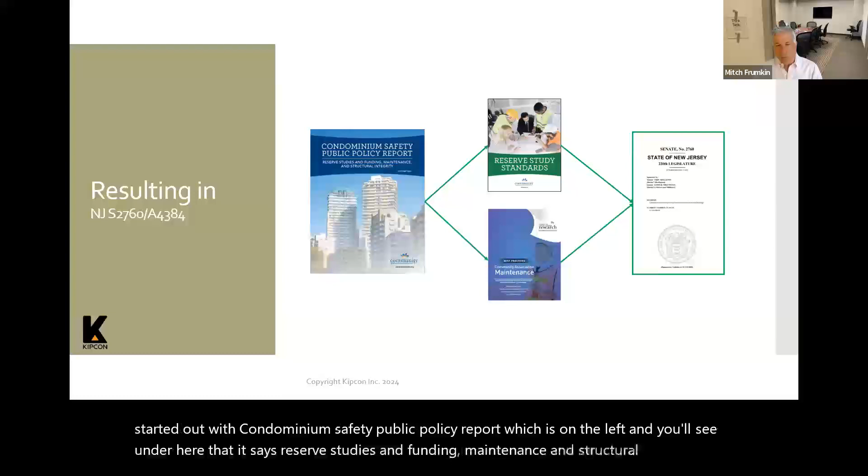And why that's there is because we quickly realized as part of this task force that building safety is not just based on reserves. There's three things that need to be taken into account, and that is reserves and funding, maintenance, and structural integrity inspections. Now, the reason why it says reserve studies and funding is because there are many states out there that have requirements that communities do reserve studies.

There are some states that have requirements that community associations do funding. And believe it or not, they don't line up, so they're not exactly the same. In some cases, you need to fund, but you don't need to do a study. In other states, you need to do a study, but you don't need to fund. So the public policy and the legislation in New Jersey is very specific in terms of both doing reserve studies and funding them.

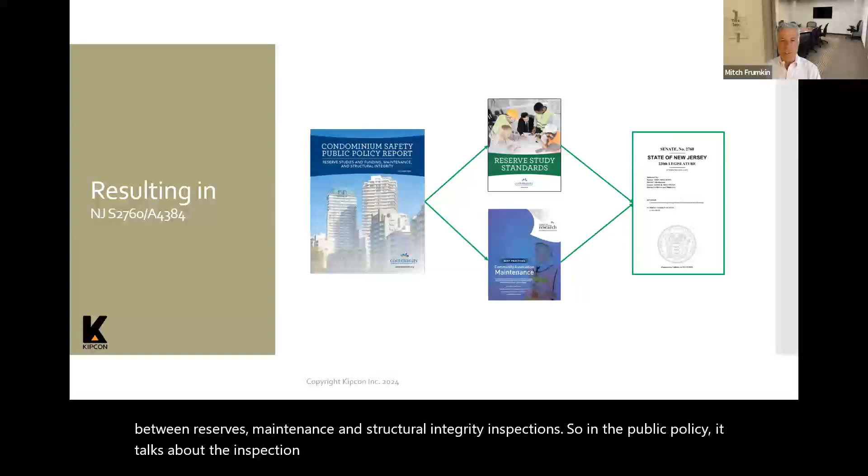The thing that came out of this task force, as I said, was that we immediately recognized the connection between reserves, maintenance, and structural integrity inspections. So in the public policy, it talks about the inspection portion of it, the structural integrity, but we also realized that the National Reserve Study standards needed to be updated.

So what they did is they put together a task force, which I was on with three other people from around the country, and the National Reserve Study standards were updated to reflect maintenance and structural integrity. And you'll see that the legislation in New Jersey refers directly to this standard as the standard to be used, and actually goes over and above what the Reserve Study standards require, and I can touch on that.

The other thing CAI realized is that there's really no publication out there from CAI regarding maintenance of buildings. So again, they put together a little task force, which I was on with 3 other people from around the country, and developed a best practices report on maintenance. You're more than welcome. These documents I'm mentioning are free, and we'd be happy to share with you copies of them.

But then as you see on the right, that's what the front page of the legislation in New Jersey looks like, which is directly tied into the public policy paper, the standards, and the maintenance best practices report. But keep in mind, what I'm talking about is happening even without legislation. What I'm talking about is something that communities should be doing and not be required to do by legislation, because what this legislation does is it really solves a problem, which I could talk about.

And I'll talk about also in the presentation that people are concerned with the cost of this. What is it going to cost to do? And from a life cycle cost basis, which I'm going to talk about, if we do what it says, it's going to cost your communities actually less. But there's also other things out there that are making this happen.

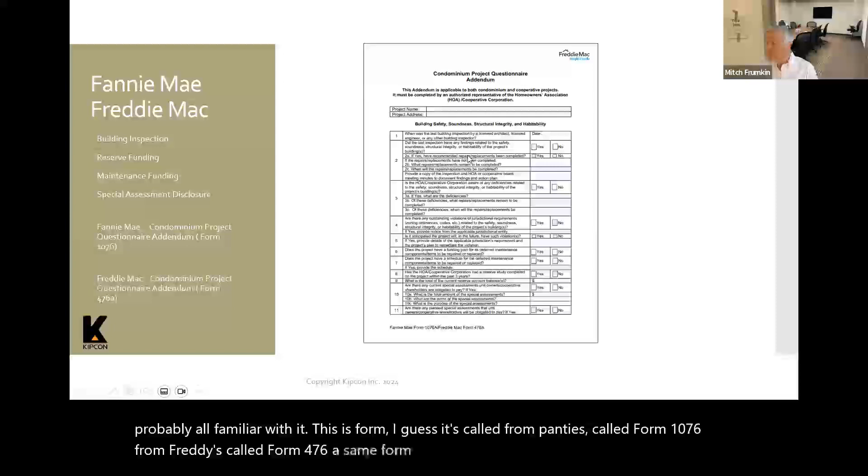As far as Fannie and Freddie, you're probably all familiar with it. From Fannie, it's called form 1076. From Freddie, it's called form 476A, same form essentially. And this is a form, an addendum to what you need to fill out for Fannie and Freddie these days in order to get approval for lending in your community for refinances and new purchases. It includes questions about building inspections, reserve funding, maintenance planning, special assessment disclosures. They want to know if there's special assessments and what they're for. And these are the forms that are put out by Fannie and Freddie.

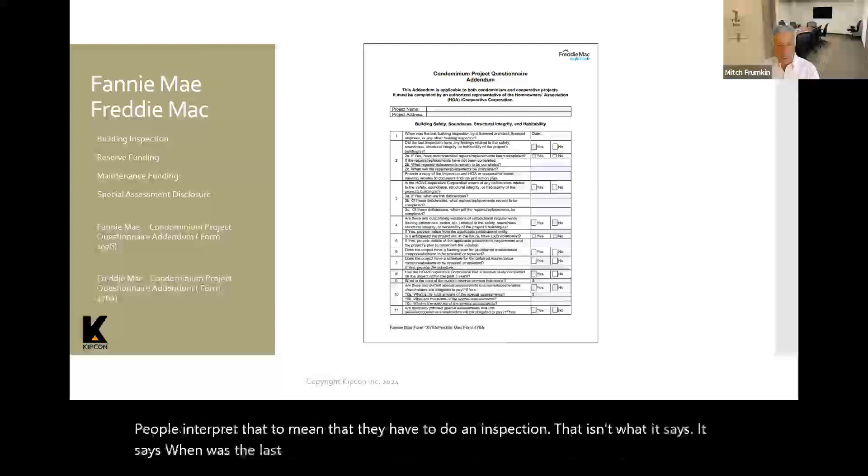One thing I always mention is that if you look at the form, question number 1 says, when was the last building inspection by a licensed architect, licensed engineer, or another building inspector? People interpret that to mean that they have to do an inspection. That isn't what it says. It says, when was the last time you had one done? And you could always answer that question to say, we haven't had one done. It doesn't say you have to do it. So be very careful about how you interpret these questions. But these are also other requirements that are going to make you do it.

So what are the solutions to the things we're talking about? As I mentioned, it's reserves and funding, maintenance, and structural integrity. And if you integrate all of these together, which is what I'm talking about, it will result in structurally safe communities, minimized life cycle costs, and maximized property values. So all of these things are connected. And if you think about all 3 of these together, everybody should want this for their communities, because it's going to cost them less and it's going to increase the value of their properties.

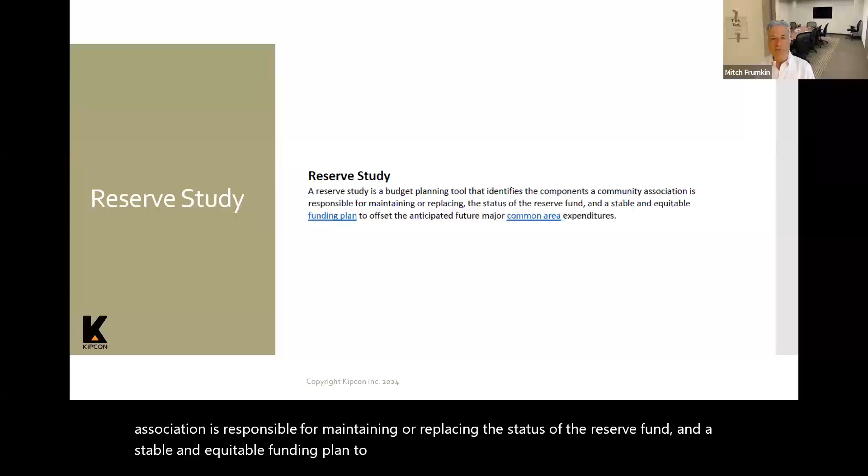So let's first talk about a reserve study. This, by the way, is taken directly out of the National Reserve Study Standards, the definition of a reserve study. A reserve study is a budget planning tool that identifies the components that a community association is responsible for maintaining or replacing, the status of the reserve fund, and a stable and equitable funding plan to offset the anticipated future major common area expenditures. That's the definition. Now, the legislation in New Jersey refers directly to the standards and this definition.

So the question always comes up, which I'll touch on, when you're doing a reserve study, how do you make sure it's adequate? What does that mean? Because the New Jersey legislation and the public policy refer to reserve studies being adequately funded. And I'm going to talk in a little while about what that means to be adequate.

So there are a few different types of studies that are out there. There's a full study. It's called a level 1. There's an update with a site visit, and there's an update with no site visit. That's called a level 3. So what do these include and what do you need?

For a full level 1 study, it includes figuring out what the components are that make up your community, the common elements that will have to be replaced. It includes a condition assessment to look at them to see what condition they're in, so you can establish their estimated remaining life based on the condition.

It includes the life evaluation. How long will they last? And how much will it cost to replace them? These are the estimates, which are based on the site visit to look at the condition. It includes a fund status and a funding plan. The funding plan I'll touch on because it specifically relates to what adequacy means.

But the fund status means how strong is your reserve fund? And this is a very misleading term, and I'll tell you why. Because if you take a component with a $100,000 replacement cost and a 10-year life, that means that you should be setting aside $10,000 a year. So after 3 years, you should have set aside 3 times $10,000 or $30,000. The fund status means how much of that did you actually set aside?

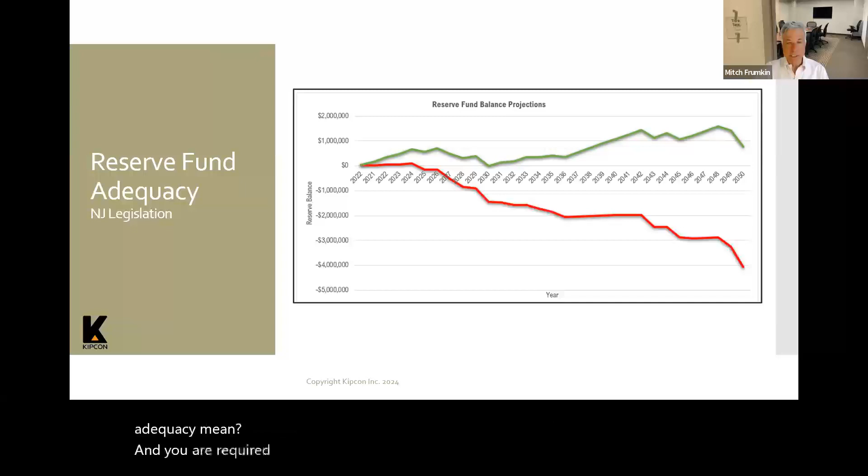And then the other thing that's a big question in terms of legislation is adequacy. What does adequacy mean? You are required in this new legislation, and it's also in the public policy and in the reserve study standards, to have adequate funding. The definition of adequate funding is that within 30 years from the date that you do your study, it should not drop below zero, where you need a special assessment or you need to borrow.

Now, if you look at the graph I'm showing you, the red line shows what's going to happen if this association continues to fund the way they're funding. They're going to run into a deficit. The red line means it's below zero, so they have a deficit. And when it comes time to replace something, they're going to need to borrow money or special assess. But keep in mind, if you have a leaky roof, the roof isn't waiting for you to get the money. You're going to need to replace it. So if you're in a deficit, it's not adequately funded. The definition of adequate, which is in the legislation, is that it cannot fall below zero.

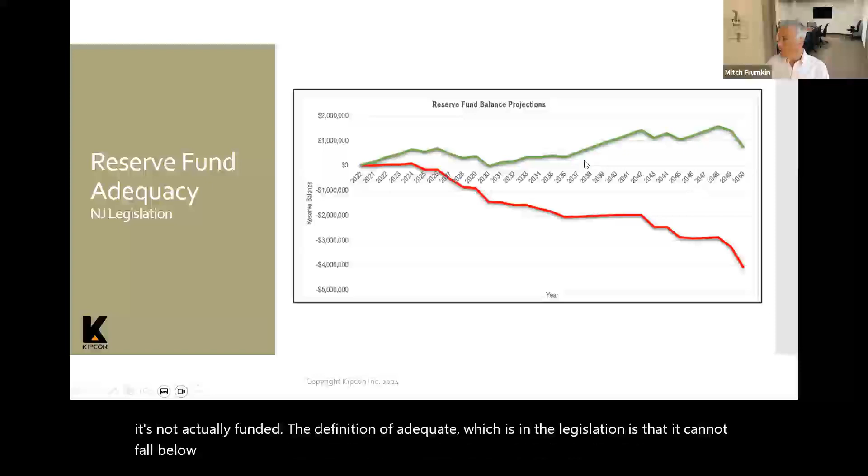Now, if you look at this green line, you'll see at the lowest point in year 2030, it drops down to zero, but it doesn't go below zero. Based on the legislation, that is adequate. But our recommendation, and all people that do reserve studies, do not recommend going to zero, because it may be adequate theoretically, but the reality is that if something needs to be replaced a year early, or it costs $10 more to replace it, you're going to run into a deficit.

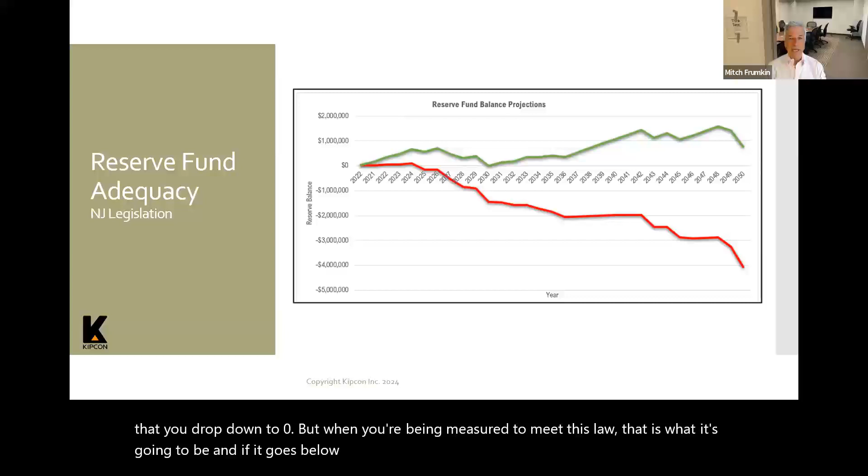That's what's known as threshold funding, where you're above zero and you establish a threshold. I'm not going to go into how to come up with the threshold for your community. That's a completely other webinar, but this is what the legislation says, and I do not recommend that you drop down to zero. But when you're being measured to meet this law, that is what it's going to be. And if it goes below zero, you're going to have to get back to adequacy. You have a number of years, which I can touch on if anybody would like me to, to get back to adequate funding by increasing your funding. So I'm going to leave that to see, Mitch, if anybody has any questions about that, but it does require you to catch up and get back to adequacy.

The public policy does not match exactly. For example, the legislation says that the person who prepares your reserve study needs to have their RS designation, the Reserve Specialist designation given out by CAI, or they need to be a licensed engineer or a licensed architect. The standard that needs to be used, irrespective of who does it, is the National Reserve Study Standards of CAI or similar standards of another recognized national organization. There really isn't another similar standard. These are pretty much the specific words that come out of legislation in New Jersey.

And keep in mind, it doesn't have to be done by a reserve specialist. It can be done by a licensed engineer or an architect. But just because you're a licensed engineer or an architect does not mean you know how to do a reserve study. It's kind of a special art, as I'm sure you all know. So I would be very careful, and my suggestion is that you stick with a reserve specialist. And many reserve specialists like myself are also licensed engineers.

For example, I have my RS and I'm a licensed engineer. But this is the requirement. To put it in context on a national level, I think there's about 365,000 community associations across the country, if I remember the latest number. And all of them, or the majority of them, are going to need to do reserve studies based on legislation and based on the banking requirements.

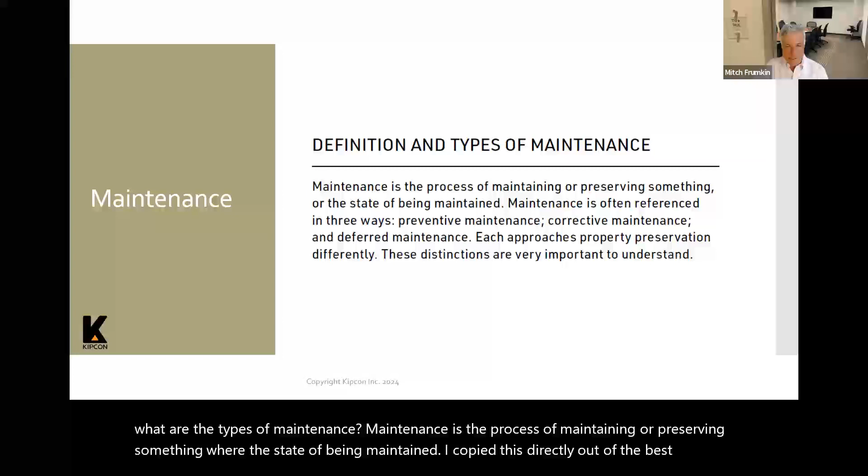Maintenance, what's the definition and what are the types of maintenance? Maintenance is the process of maintaining or preserving something or the state of being maintained. I copied this directly out of the best practices report on maintenance. Maintenance is often referenced in 3 ways, and I'll touch on them: preventive maintenance, corrective maintenance, and deferred maintenance.

Now, when you go into legislation in New Jersey, as well as the public policy paper it's based on, it specifically refers to preventive maintenance and corrective maintenance. It does not use the term deferred maintenance. The reason for that is that deferred maintenance means you do nothing.

Preventive maintenance is a proactive plan aimed at reducing the deterioration of the component so it can achieve its useful life. So if you have something with a 20-year life on your reserve study, you want to make sure it attains 20 years. So you proactively do something so that it attains that full useful life.

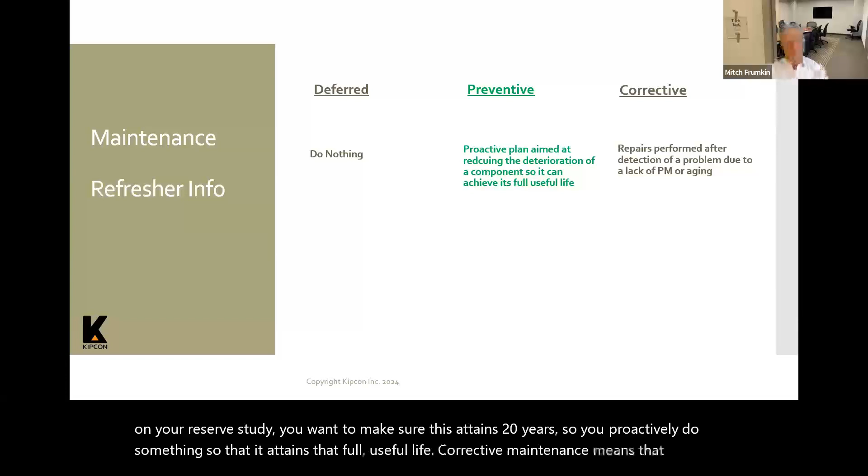Corrective maintenance means that if you don't do preventive maintenance and something starts falling apart, you have to fix it. It's repairs performed after detection of a problem due to a lack of preventive maintenance or aging. The other thing to keep in mind is corrective maintenance happens even if you do preventive maintenance, because as things age, you can't predict how they're going to age and what needs to be fixed. If you fix it sooner rather than later by doing corrective maintenance, it's going to cost you a lot less money.

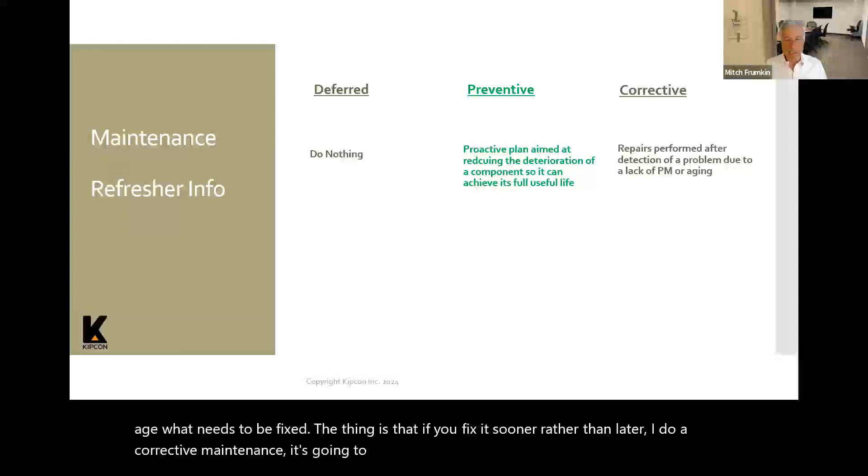The other thing is, from the legislative perspective in New Jersey, when you do a structural integrity inspection of your building, if you need to, which I'll get to, the report needs to include any necessary corrective maintenance that needs to be done to the structure. The legislative requirements in New Jersey say that if that structural engineering report says you need to do corrective maintenance, that corrective maintenance should be included in the reserve study. The national standards also say that corrective maintenance should be included.

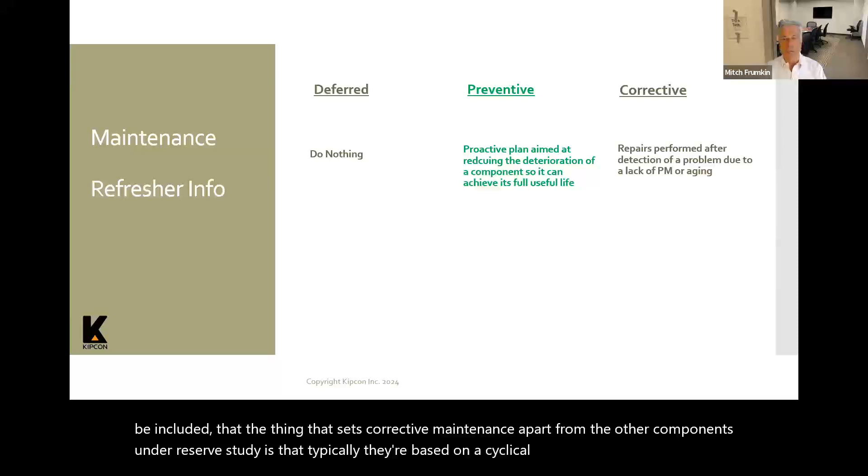Now, the thing that sets corrective maintenance apart from the other components on a reserve study is that typically they're based on a cyclical replacement. You replace a roof every 20 years or 25 years. Corrective maintenance is a one-time thing. You shouldn't have to correct things over and over on a time frame. So corrective maintenance is added to your reserve study as happening one time. So you have to be very careful when that's added. You have to make sure that the reserve provider is only including it as happening once, not over and over again, but it should be included in your reserve study based on the legislative requirements.

So what do you do? Deferred maintenance, you should never do it. Deferred maintenance means you're not doing it, and that's not the approach you should take. Preventive maintenance, you should all be putting together a preventive maintenance program for your community. When you do your reserve studies based on the New Jersey legislative requirements, you're going to have to do it. It has to be part of the reserve study. And then you should do corrective maintenance as needed, because if you don't, you're ultimately going to have to do it, but the sooner you do it, the less it's going to cost.

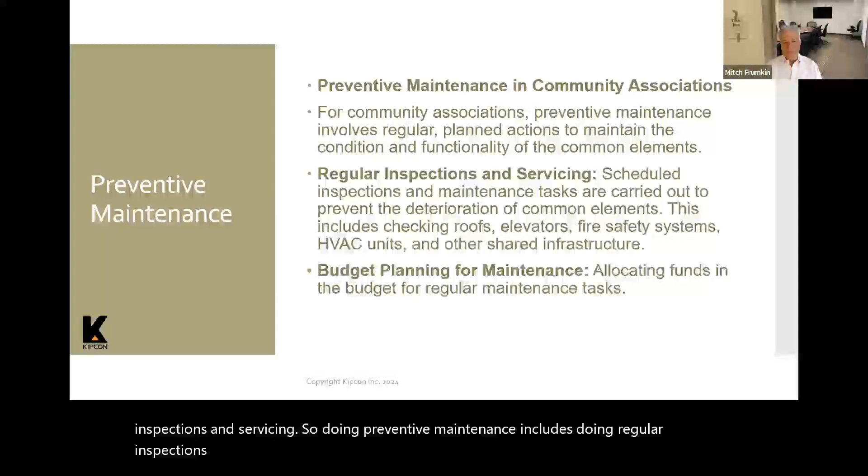So what does preventive maintenance include for community associations? Keep in mind, it's not just doing something to a component, but it includes regular inspections and servicing. If you're in the state of New Jersey, that regular inspection is being done as part of the reserve study, because you're not only updating the components in the reserve study, but you're updating the preventive maintenance plan. So that regular inspection takes place when you do the reserve study update.

If you do the reserve study update from 3 years to 5 years, I think it's too far apart. And regular inspections can be done by management. It can be done by many different people. But in some cases, communities ask us to do a yearly inspection just to see if anything's deteriorating too quickly so that they can fix it or maintain it and not wait 3 years. But it includes regular inspections. It includes checking roofs, elevators, fire safety systems, and other shared infrastructure.

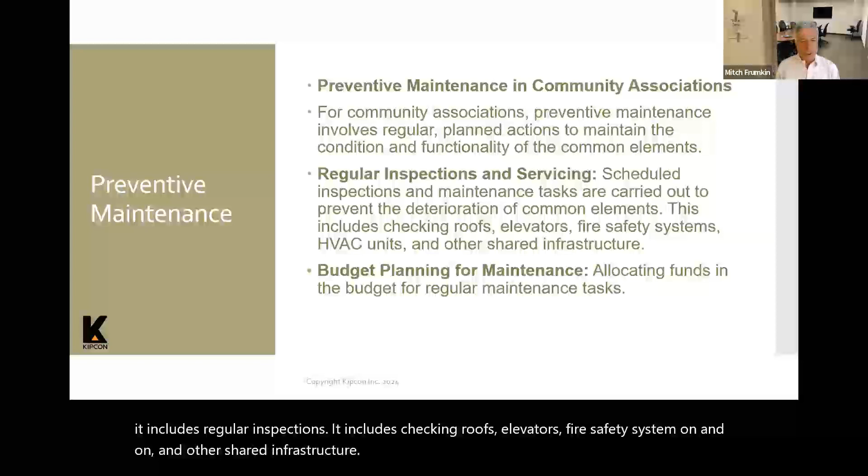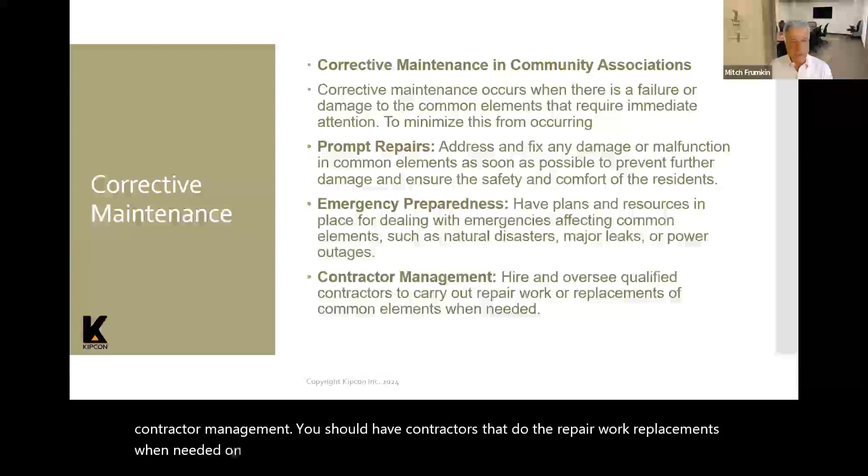The other thing that you should be doing is budget planning for maintenance. You should be allocating the funds, but in New Jersey, like I mentioned, from a legislative perspective, you are, because you have to, it's the law. What's corrective maintenance? Corrective maintenance is you should do prompt repairs if something breaks, as I mentioned, because it'll cost less. Emergency, you should have plans in place for dealing with emergencies affecting common elements. And you should have contractor management. You should have contractors that do the repair work or replacements when needed on an ongoing basis. So that's corrective maintenance.

Now let's talk about structural assessments. A lot of questions have come up about the legislation in New Jersey in regards to what does this really mean and what needs to be done. So that's what I'm going to be touching on now. But before I go on to structural, Jody, is there anything in the chat box about reserves that I should respond to now? Yeah, so there's a couple of questions. So one is, assuming the association has 10 years to catch up to fully funded.

Jody, I can't hear you. Oh, you can't? You know what I did? I didn't have my microphone on. I'm glad you could hear me because I couldn't hear you. Okay, sorry. Okay, that's why you weren't letting me interrupt you before. I'm sorry, I didn't hear you. I wish I could turn off everybody that way.

All right, so assuming the association has 10 years to catch up to fully funded, how do they deal with a large reserve project that occurs in the middle of the period, like new asphalt for a parking lot in year 6? In year 10, they would no longer need to show fully funded for the asphalt because it was recently completed. Yes? Yeah, I kind of assumed I'd get this question, because I know in the law in New Jersey, if in order to get to adequate funding, which I described, you need to set aside more than 10% of your last year's common area assessments.

So let's say your last year's common assessments were $100,000. If in order to get adequate funding you have to set aside more than 10% of that, or $10,000, the legislation says you have 10 years to catch up. So if you're $10,000 short, it's $1,000 a year over 10 years. But if something needs to be replaced sooner than that 10-year period and will force you into a deficit, you have to catch up to adequate funding before that component has to be replaced, which is logical because it's going to need to be replaced. If you don't have the money, you're going to have a special assessment or you're going to need to borrow.

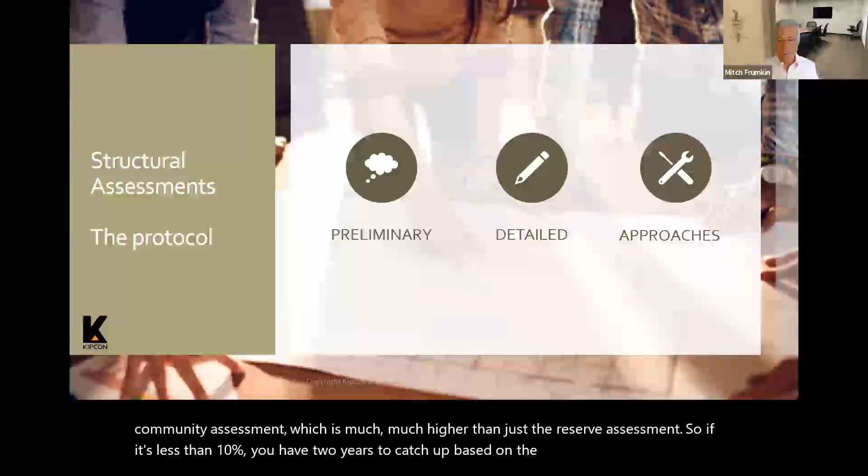The thing that's interesting is that there's a little conflict in the legislation. It says that if it's more than 10%, you have 10 years to catch up. But at the same time, it says you have to update your reserve study a maximum of every 5 years. So what happens if you have to catch up? You have 10 years, but then after year 5, you're updating your reserve study. The thing that's interesting, if you follow what I'm saying, though it's not a reserve presentation, is that as soon as you get to that update period at 5 years, when you're updating it, you're preparing a 30-year funding plan.

To show adequacy, you no longer are locked in to that 5-year additional period to catch up, because it goes out 30 years. I've really gotten into the weeds a little on that one, but there's a little conflict in the legislation that we all missed in terms of update period versus catch-up period. But the legislation is pretty clear that you do have to get to adequate funding by a period of time. And I hope I answered that question and more.

Jody, are there any other ones about reserves? Somebody wanted to know: on their audited condo docs, they have a deferred maintenance fund. Should they change that? Another great question. In our industry for many, many years, including us, we're not exempt from this, people have been using the term deferred maintenance improperly. They've been using the term deferred maintenance when they really meant preventive maintenance.

Everybody I've spoken to, now that the legislation is in place, which matches the best practices report on maintenance, is changing the terminology they use from deferred maintenance to preventive maintenance. So it's a great question. We've been using the wrong term forever because we just have. So change it wherever you have it to preventive maintenance.

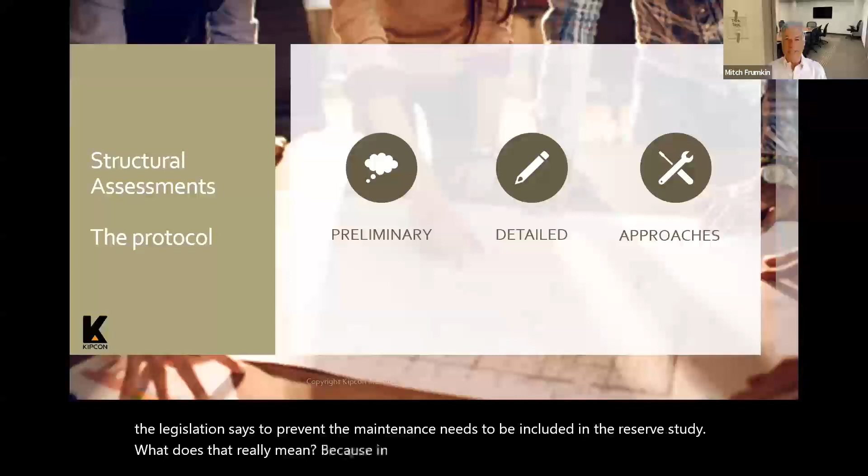The other thing that comes up with that question is that the legislation says preventive maintenance needs to be included in the reserve study. What does that really mean? Because in some communities, they have a line item or multiple line items for preventive maintenance within their operating budget. So the question comes up, do we need to move all of those into our reserve study rather than in the operating budget?

That dust has yet to settle, but where it says included in your reserve study, I don't really see a reason why in the reserve study you can't refer to another part of your budget where that preventive maintenance is. And that in essence will be including it in the reserve study. So that's another question that's been coming up.

Jody, any other ones? Yeah, somebody would also like you to repeat the definition of adequate funding. Adequate funding essentially means that if you do a reserve study, within 30 years of doing that reserve study, if your fund account goes below 0, you're not adequate. So essentially, if you're going to need a special assessment or to borrow, same thing. The concept is go out 30 years with a cash flow projection, and if it goes below 0, you are not adequately funded.

Anything else? I think we're good. Okay, because I see there's 42 comments in there.

All right, now I'm going to move on to the structural assessments. There's a few different types of structural assessments, known as preliminary and detailed. I'm going to touch on what they mean, and there's a number of different approaches to do them. There's been a lot of questions about how do you do this, so I'll touch on that. I'm not going to go into detail. This is really not meant to be an engineer's training program, but to give you the concept of what it means.

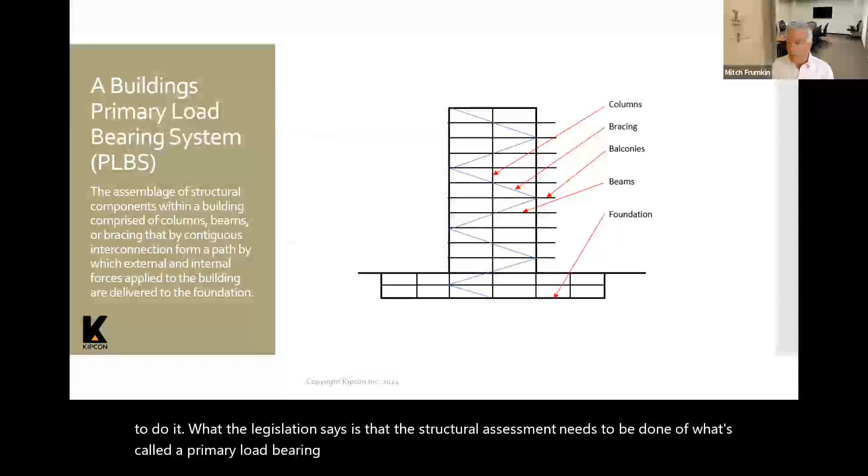But first, let's talk about when you do a structural assessment, what does it mean and who needs to do it? The legislation says the structural assessment needs to be done of what's called a primary load-bearing system of a building. Now, the primary load-bearing system, and that wording comes out of legislation and is a little technical in nature, means that if any one of these things of the structure disappears or rots away over years, a portion of the building or the entire building can collapse.

So the primary load-bearing system is made up of columns, which are these vertical guys that hold up the building, these braces, which are diagonal, which keep the building from falling over if the wind blows. The balconies, as I mentioned, were added. The beams, which are the horizontal. So if any one of these rot away, then the building can collapse. That's the primary load-bearing system.

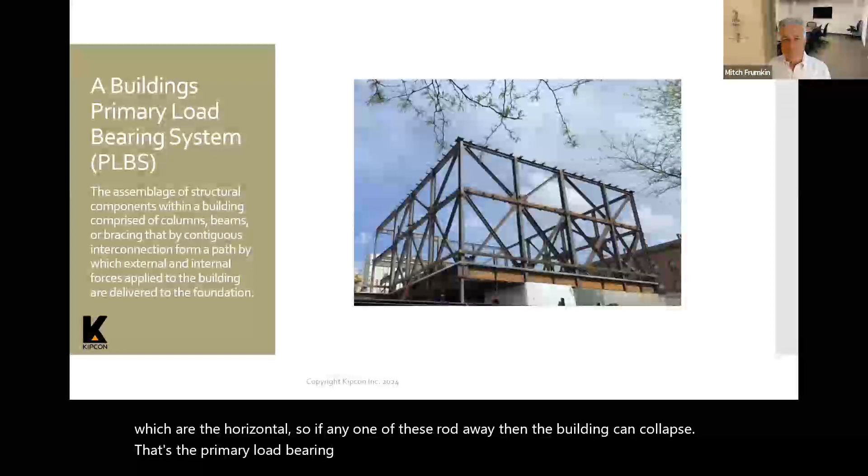This is an example of what it actually looks like on a building. This is a steel building. So picture this. You can see my pointer if I'm not mistaken. If this column right here rusts away, this entire corner of the building will collapse. It's the primary load-bearing system.

If this brace here rusts away and the wind blows, this upper part of the building will blow over. If this horizontal beam rusts away, then the building will collapse in this area. So keep in mind that the primary load-bearing system means something that is not repetitive, which means if something happens to one of them, it can affect a portion of the entire building.

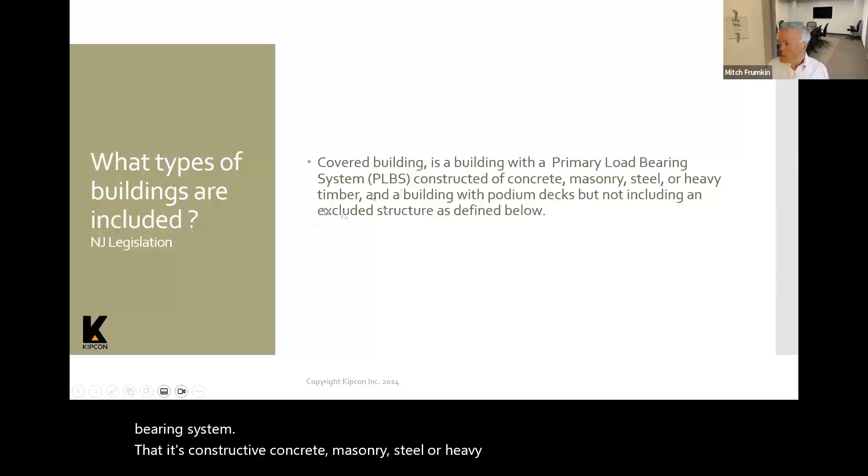And I'll show you an example of that, what that means also. But that's the primary load-bearing system. So buildings that have a primary load-bearing system that is constructed of concrete, masonry, steel, or heavy timber are buildings that are required to have a structural integrity inspection done.

We get a lot of calls from people who say, this is what my building looks like, do we need to have this inspection done? And a lot of times we can tell just by looking at the picture, but sometimes we can't. So we ask them if they have the architecture or the engineering drawings because we can look at them.

The other thing we do now is that when we do a reserve study, we'll evaluate your building as part of the reserve study to tell you whether or not we feel you need, based on the legislation, to have these structural integrity inspections done. So this is where it's needed.

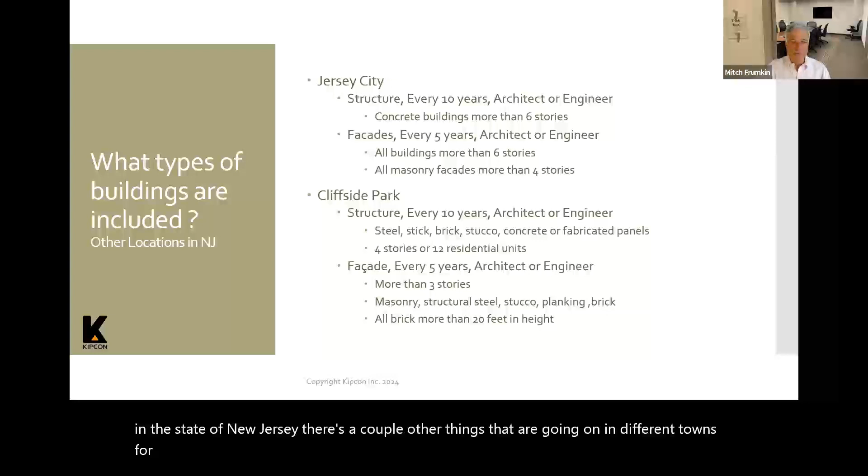Now, in the state of New Jersey, there's a couple other things that are going on in different towns. As I mentioned before, the legislation does not include looking at the facades. I will tell you that in Newcastle, Delaware, the legislation there does include the facades, but that was done later than New Jersey. And one of the things I've learned is once you get legislation in the works in a state, not just New Jersey, even if things change, it's tough to change the legislation.

But in Jersey City, it requires that you do a structural inspection every 10 years, done by an architect or engineer, and it says for concrete buildings more than 6 stories. Now, as soon as I saw this, I said, well, what if it's a concrete building that's less than 6 stories that's falling apart? Because the primary load-bearing system is not based on the height of the building, it's based on the materials that it's made out of.

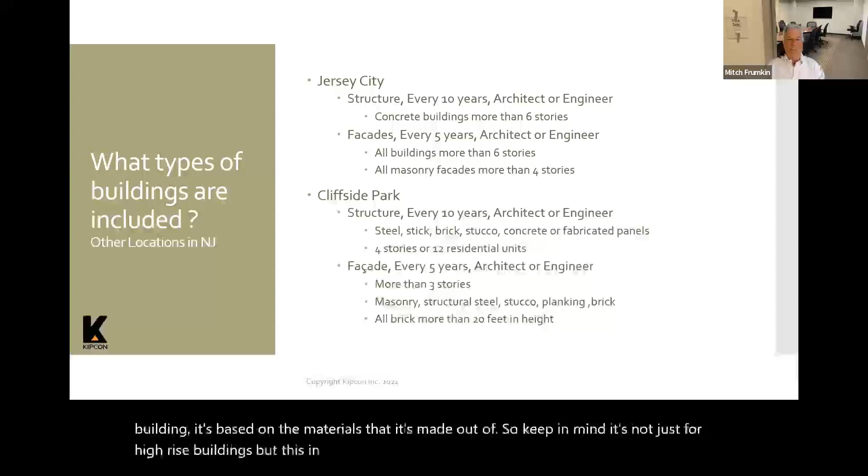So keep in mind, it's not just for high-rise buildings, but Jersey City says for concrete buildings more than 6 stories. What if you have a steel building that's more than 6 stories? On and on. Also in Jersey City, it says you have to inspect the facades every 5 years by an architect or an engineer, and the structure every 10 years by an architect or an engineer.

The legislation in New Jersey says that the structural inspection needs to be done by an engineer. It does not give the option of it being done by an architect. Architects are not trained in engineering, and engineers are not trained in architecture. So in this case, it says architect or engineer, but keep in mind, when you're soliciting a proposal from somebody to do these inspections, make sure they have the qualifications.

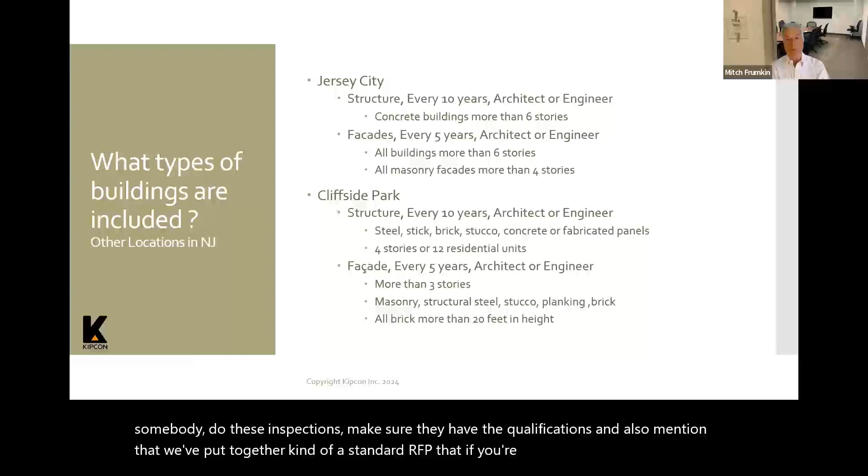And I'll also mention that we've put together a standard RFP so that if you're selecting an engineer to do either a reserve study based on the new legislation or a structural integrity inspection, we can provide you with a standard RFP to select a bid. It doesn't have Kipcon's name on it, but it is in conformance with this legislation if you'd like a copy.

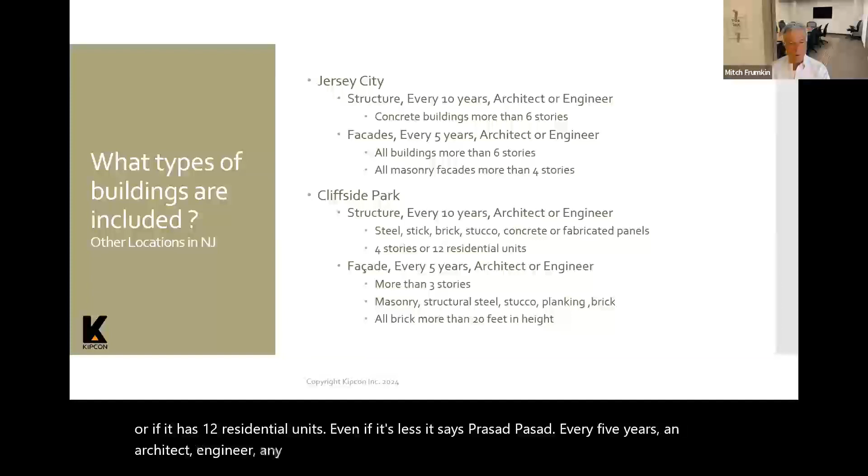Jersey City says facades every 5 years for all buildings more than 6 stories, or all masonry facades more than 4 stories. For Cliffside Park, it says structure every 10 years, architect or engineer, steel, stick, brick, stucco, concrete, or fabricated panel structure, 4 stories or more in height, or if it has 12 residential units, even if it's less. It says facade every 5 years, architect or engineer, any building more than 3 stories, or if it's a brick building that's more than 20 feet, even if it's less than 3 stories, it would need to have the facade inspected. So I don't really know where all these things came from, but that's what they say.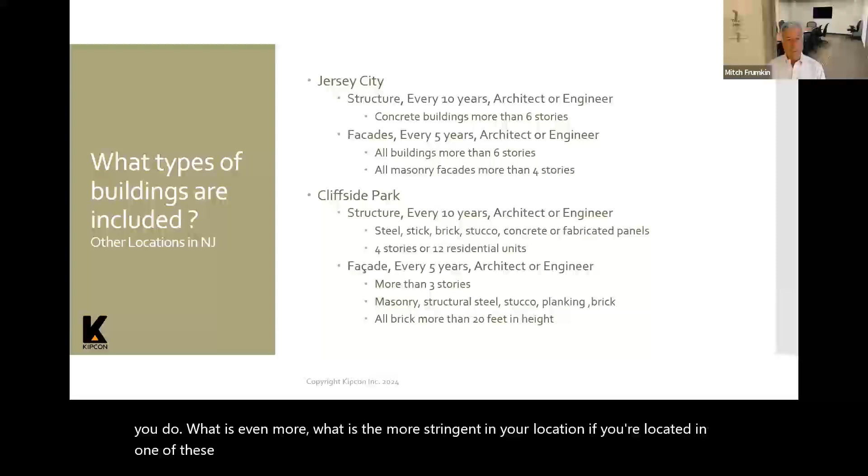From listening to all the legal scholars and the politicians I've spoken to, if this is more stringent than what the state legislation requires, you do what is more stringent in your location if you're located in one of these places. So for example, in Jersey City, the structural criteria in the legislation is more detailed and has more requirements than theirs does, but it does not include the facades.

So in Jersey City, you should do the structural integrity inspection based on the legislation, and you should do the facades that aren't included in the legislation. So that's the general concept of how it works. Now, the only other one is Hackensack. Hackensack says for all commercial or multifamily residential.

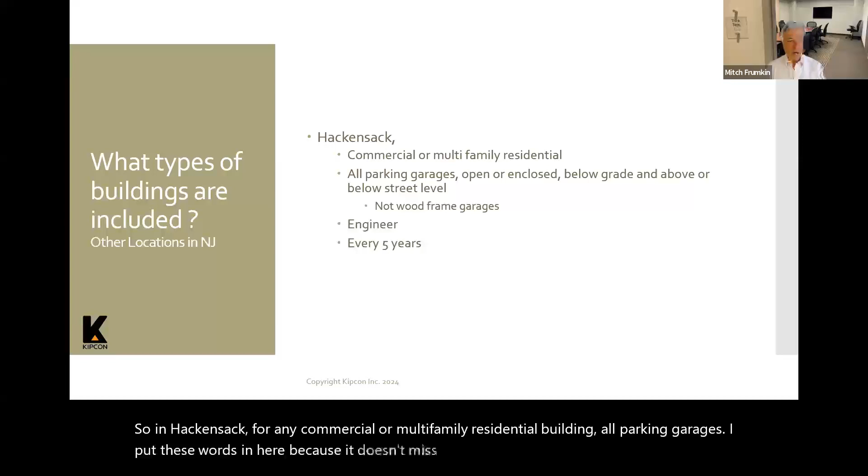And by the way, when we go back to these guys, Jersey City and Cliffside Park, it doesn't just say community associations. This is for any building. So in Hackensack, for any commercial or multifamily residential building, all parking garages, and I put these words in here because it doesn't miss a thing, open or enclosed parking garages below grade and above or below street level, they all need to be inspected by an engineer every 5 years. It does not include wood frame garages, but this is in place in Hackensack.

A number of years ago, they had a collapse of a parking garage. That's why this is in place. And we have done many inspections of parking garages in Hackensack based on this type of thing. So what's not included? I talked about that in a primary load-bearing system. If one piece of the structure fails or rusts away, the building can collapse.

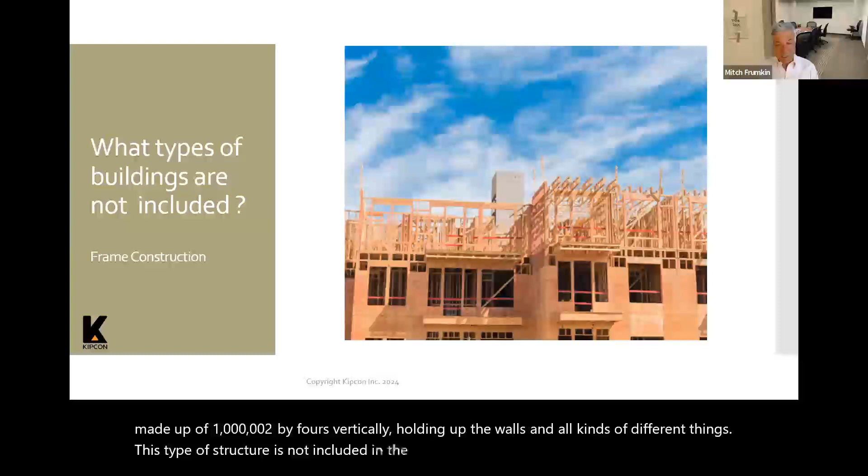Buildings that have very repetitive structures are not included. So for example, this is known as frame construction, what you're looking at. It's made up of a million 2x4s vertically holding up the walls and all kinds of different things. This type of structure is not included in the legislation to be inspected and having a structural integrity inspection. So this is excluded. A lot of buildings are made this way. And that's because if one of these columns or something rots away, the building's not going to collapse.

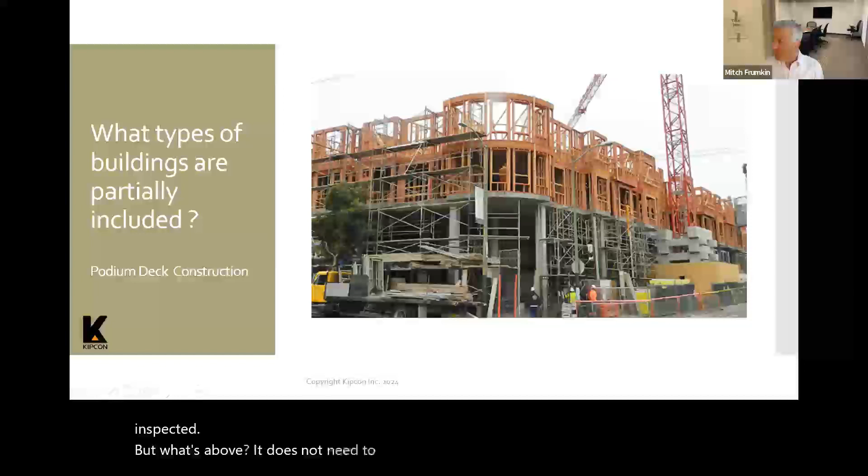But then you have a hybrid, which has both. For example, this building on the bottom, this is known as a concrete primary load-bearing system with a podium deck. This podium deck right here, this horizontal deck, is made out of concrete, and it supports a frame-built building above made out of wood. So in this type of construction, the podium deck and this load-bearing system below made out of concrete would need to be inspected, but what's above it does not need to be inspected. The reason for that clearly is if one of these columns in the bottom goes, this entire upper section is going to collapse with it. So this is kind of a hybrid that needs to be partially inspected under the law.

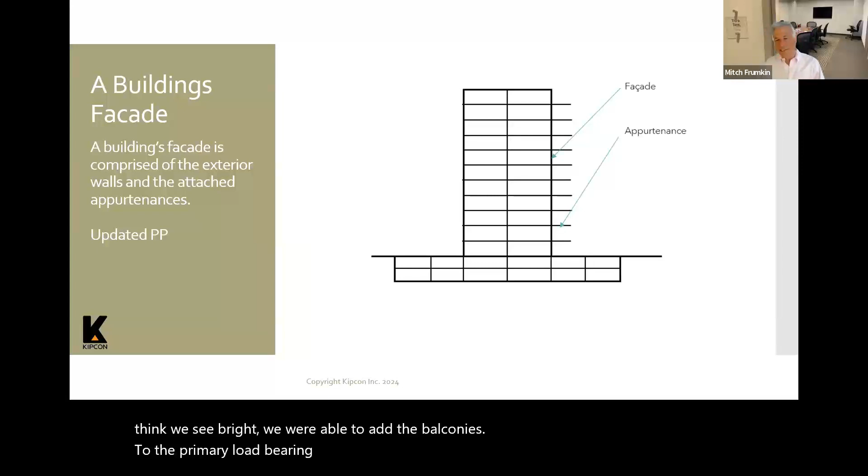Now, this is the facade, just to give you an idea. The facade is the outside of the building and includes everything that's attached to the outside of the building. As I mentioned, in New Jersey, due to the collapse of the balcony, and I think it was Seabright, we were able to add the balconies to the primary load-bearing system, even though they're really not technically part of it, but those do need to be inspected under the New Jersey regulations. And that's included, as it says here, in the updated public policy.

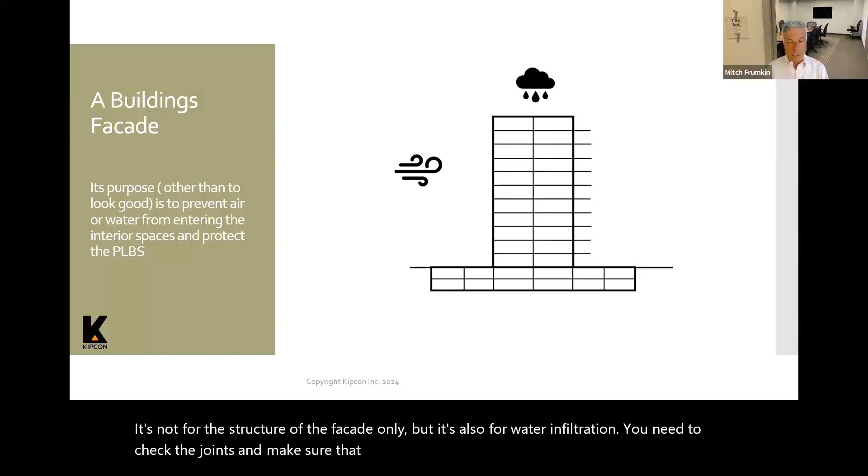Now, why are the facades important? The facades are important because not only do they look good, but the facades have joints in them, expansion joints and things like that, where if it rains, water can get through them. And if water gets through them, it can rot away the primary load-bearing system behind it. So that's why it's very important, and that's in the legislation. New Castle, Delaware is very specific. It's not for the structure of the facade only, but it's also for water infiltration. You need to check the joints and make sure that they're sealed properly so water can't get in. That's what the CAI updated public policy also includes, the facades and the water getting through the facades.

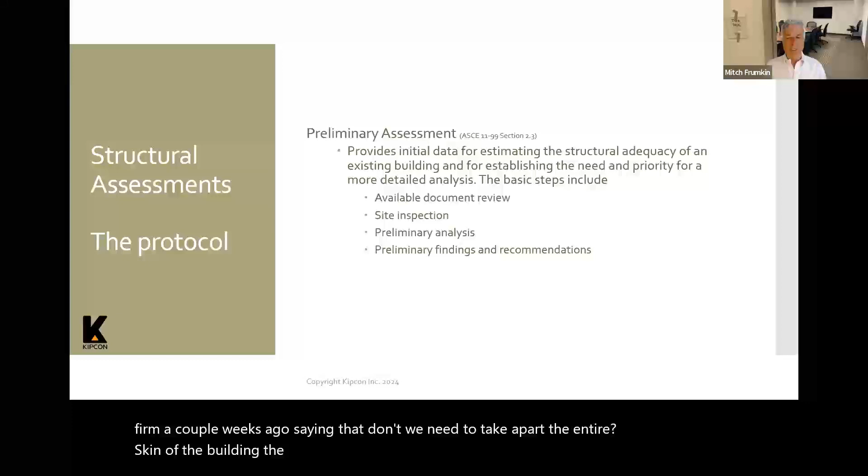All right, now let's move on to structural assessments. What's the protocol? This is where a lot of questions have come up. Now you'll see in here, it's broken down into two types of assessment, a preliminary assessment and a detailed assessment. Now the question that comes up a lot, which I'll touch on, is that when you're doing an assessment of a building, there's a lot of the structure you can't see. So what do you do? There was one engineering firm a couple of weeks ago saying, don't we need to take apart the entire skin of the building, the walls on the inside, the ceiling, so we can see the primary load-bearing system and the condition? That's what I want to touch on, because there's a preliminary assessment and a detailed.

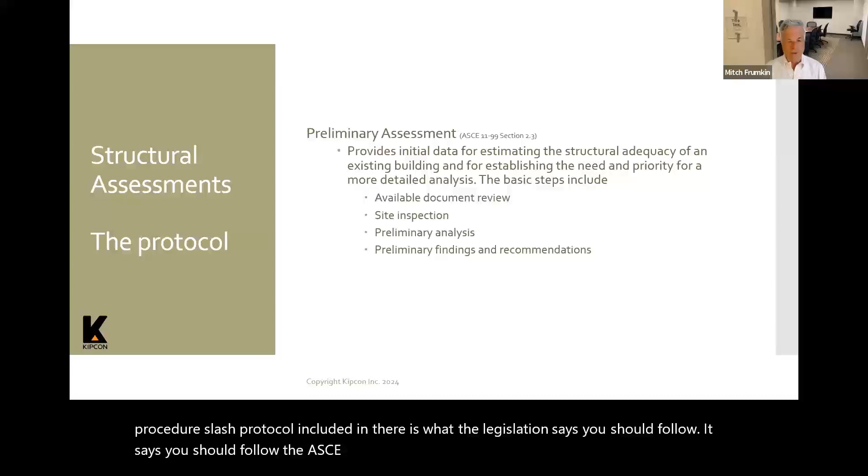In both cases, you'll see here, it says ASCE 11-99, section 2.3. What that means is the American Society of Civil Engineers has put out a standard for inspecting the structure of existing buildings. That's referenced in the New Jersey legislation. And the protocol, actually in the standard, it's called a procedure, not a protocol. But the procedure/protocol included in there is what the legislation says you should follow. It says you should follow the ASCE protocol for doing the structural integrity inspections, which is very clear. There's a preliminary assessment and a detailed assessment.

The preliminary assessment provides the initial data for estimating the structural adequacy, clearly. The basic steps include looking at all documents. Look at all the documents. By the way, these reports need to be signed by a licensed engineer, but you look at all the documents to see if there's anything in those documents for the association that will indicate that there's any kind of structural problems.

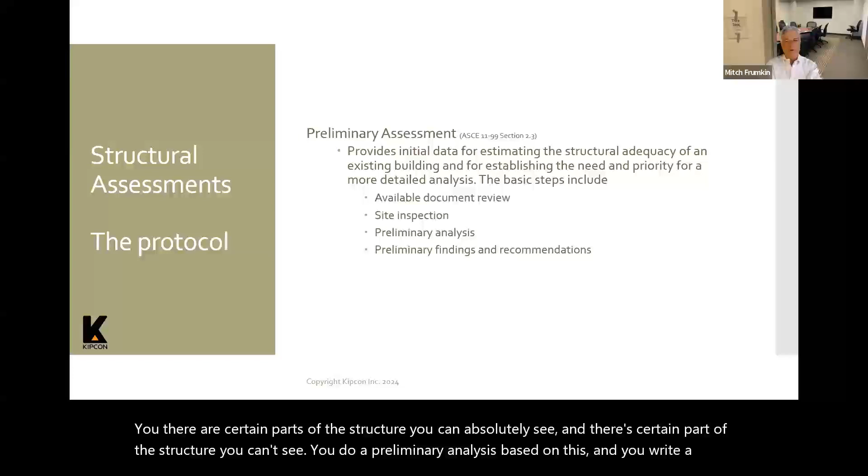You do a site inspection. So you're looking at the entire building. And I'll show you what that means, because there are certain parts of the structure you can absolutely see, and there's certain parts of the structure you can't see. You do a preliminary analysis based on this, and you write a report with your preliminary findings and recommendations. That's what the preliminary assessment is.

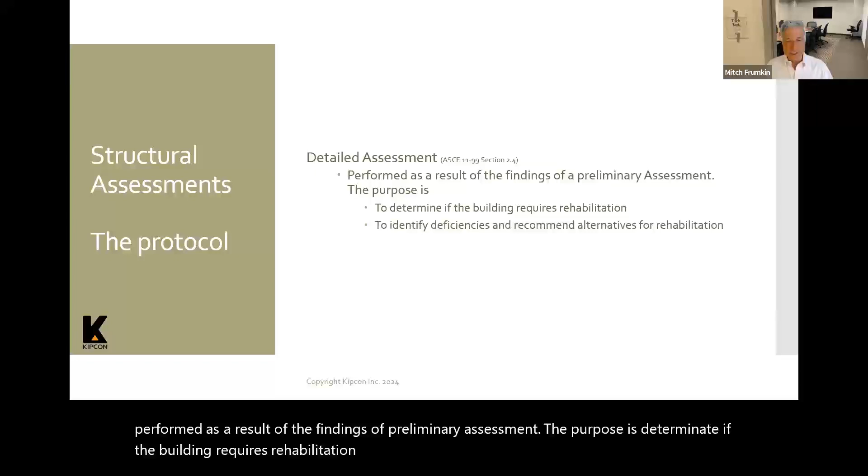No matter what I talk about today in the next section of this presentation, you always need to do this type of visual preliminary assessment for whatever you're doing, because that's the starting point. Then you get to a detailed assessment. Again, this is section 2.4 of ASCE, and it's performed as a result of the findings of the preliminary assessment. The purpose is to determine if the building requires rehabilitation, to identify deficiencies and recommend alternatives for rehabilitation.

Now, keep in mind that, and I'll show you some examples, the detailed assessment is only needed if you see problems when you're doing the preliminary assessment. And the other thing it does is, rather than having to take apart the entire building to see if there's a problem, you're going to look at the entire building, and then you're going to focus on certain areas only if you see potential problems. And I'll show you some examples of that in a second.

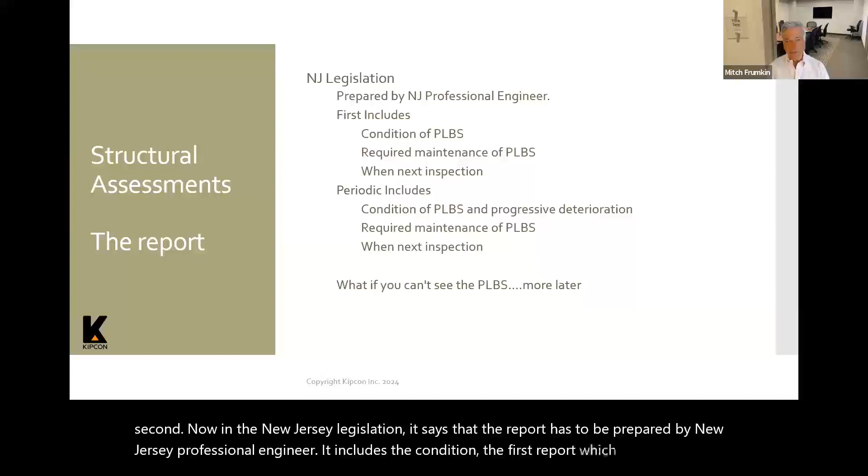Now, in the New Jersey legislation, it says that the report has to be prepared by a New Jersey professional engineer. I'll tell you about the timing of these; I think I have the timing here somewhere. If I don't, remind me and I'll tell you what it is. But the first report includes the condition of the primary load-bearing system and the required maintenance of the primary load-bearing system. So if you're doing a structural integrity inspection of your building, you're also doing a reserve study, and this required maintenance that's included in this report should be put into the reserve study. And it also says when the next inspection needs to be performed.

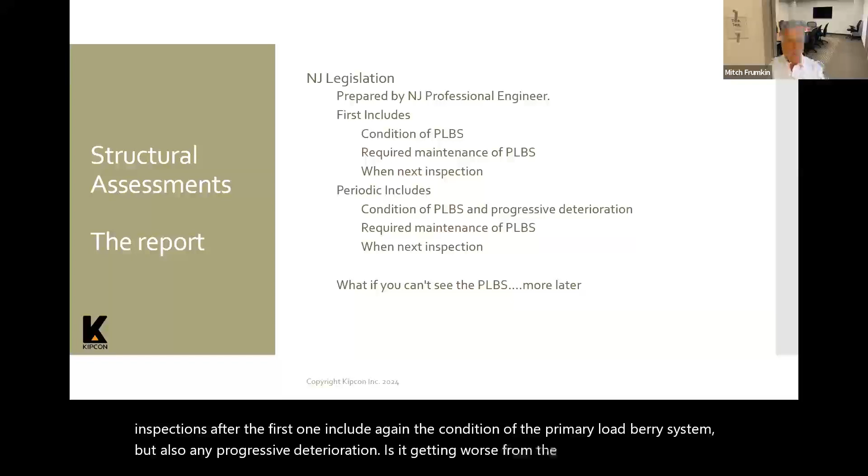The periodic inspections after the first one include, again, the condition of the primary load-bearing system, but also any progressive deterioration. Is it getting worse from the first report? Which means it's very important to keep the first report, which is also known as a baseline report. And whenever you do updates to that report, a copy of that report needs to be given to the firm who's doing the updates, because they're going to see if there's any progressive deterioration. Again, required maintenance and when you should have the next inspection. And what if you can't see the primary load-bearing system? I'll touch on that in a second.

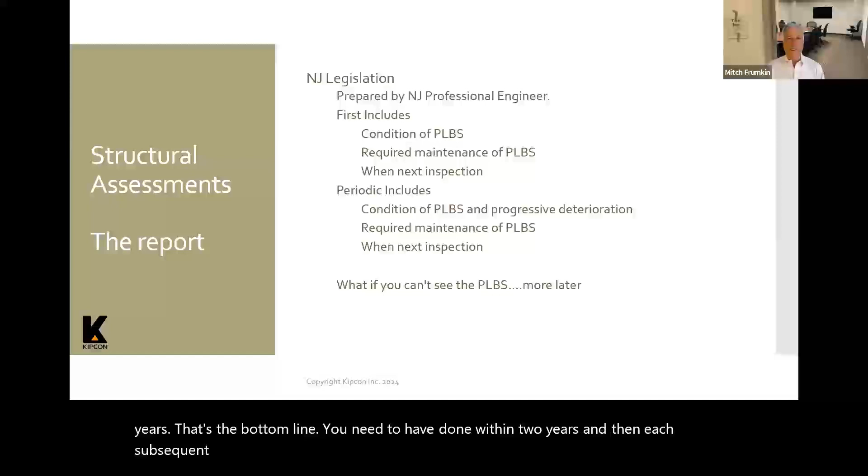Now, there's a slide in here somewhere, but let me touch on it now. So the first inspection: I'm assuming everybody here today, I think there's 88 of you now, is working on existing buildings. If your building has this type of structure and is more than 15 years old, you need to have this structural assessment done within 2 years. That's the bottom line. And then each subsequent inspection needs to be done a maximum of every 5 years. So that's what you need to do.

If your building has this kind of structural system and is less than 15 years old, you need to have a structural assessment like this done within 1 year after it turns 15 years old. The only asterisk there is that if you ever notice any deterioration or any problems with any part of the structure, you need to have an inspection done within 60 days at the latest, or if it's a real problem, you need to have it done immediately.

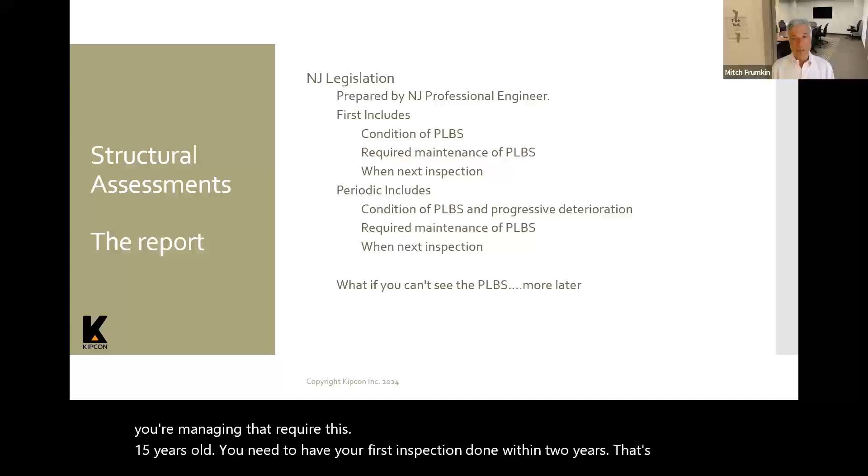But from a timing perspective, if you have a building, and most of the buildings I think that you're managing that require this are more than 15 years old, you need to have your first inspection done within 2 years. That's the law. That's what it says. So keep that in mind. The other interesting fact, if you find it to be interesting, is you can find information about the ages of buildings in New Jersey, and it comes from the Census Bureau.

And multifamily residential buildings in the state of New Jersey, which are owned, which really lead toward community associations, I think it says 60–70% of them at least are more than 15 years old. So for those buildings, a lot of inspections are going to need to be done.

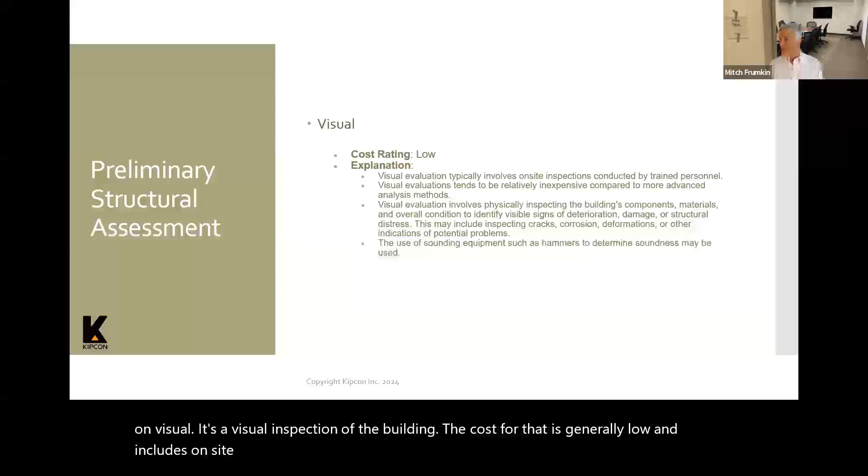So now let's talk about the different types of inspections. The preliminary structural assessment, like I said, is based on visual. It's a visual inspection of the building. The cost for that is generally low, and it includes on-site inspections, inexpensive, physically inspecting the building's components. And keep in mind what happens if you can't see something, which I'll get to in a second.

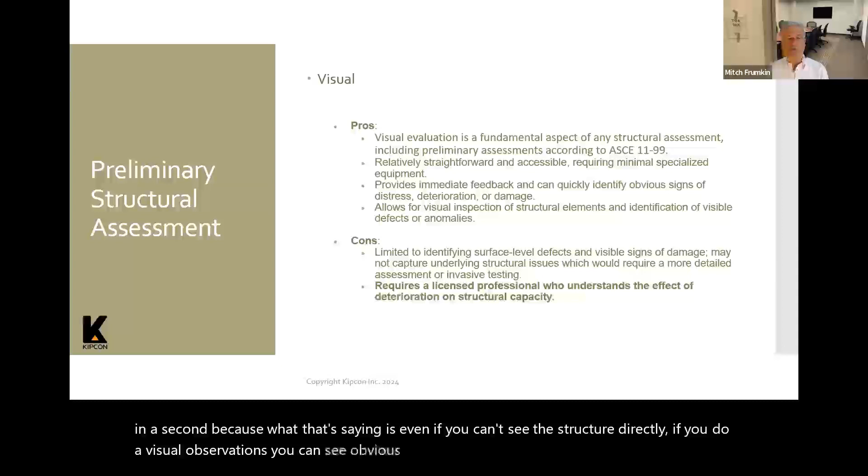The pros are that it's required of just about anything you do; you have to do a visual inspection. You have to start with it, and in the definition of preliminary assessment, ASCE, it includes visual. It's relatively straightforward, provides immediate feedback, and can identify obvious signs of distress, deterioration, or damage. So what that's saying is, even if you can't see the structure directly, if you do visual observations, you can see obvious signs of distress, deterioration, or damage, which then would lead you to a detailed assessment. It allows for visual inspection of structural elements and identification of visible defects.

The problems with it are that it's limited to identifying surface level defects and visible signs of damage, and it requires a licensed professional who understands the effect of deterioration on structural capacity. The reason why the legislation requires this to be done by a structural engineer is because most people can identify the damage when I show you some pictures, but an engineer can tell you whether or not that damage affects the structural capacity of the building. So there's a big difference there.

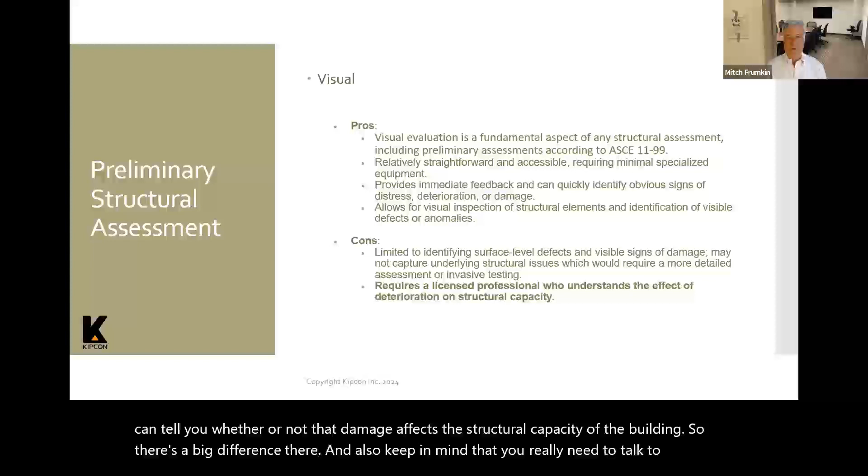And also keep in mind that you really need to talk to whoever the engineer is that you're going to hire to do this, because most structural engineers are trained in school to design new buildings. They're not trained, and most schools that I know of don't include how to inspect an existing building structurally as opposed to designing a new one. So you have to be very careful about who you select to do it. But the first step is visual.

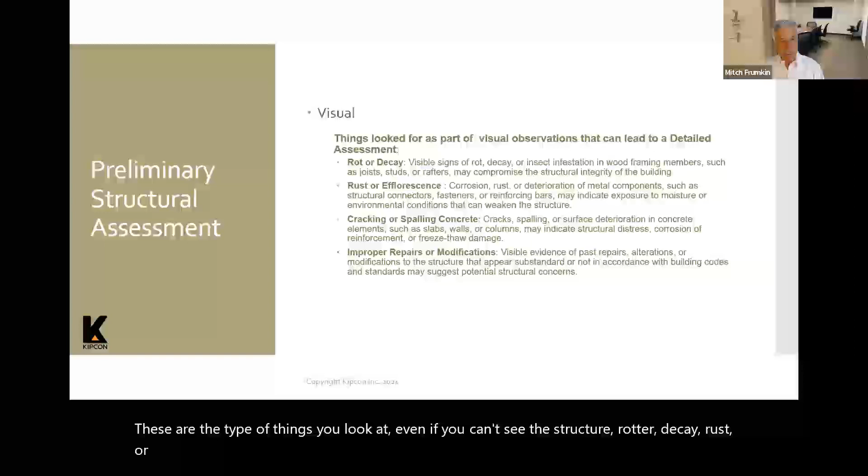When you're looking at a visual, you're looking at a number of different things that may indicate that there's damage behind the walls or ceilings that you can't see. For example, cracks to finishes, bulging or bowing, staining or discoloration, uneven or sagging floors, settlement or movement. These are the type of things you look at even if you can't see the structure. Rot or decay, rust or efflorescence, which I'll touch on in a second, cracking or spalling concrete, improper repairs or modifications. So what does this look like?

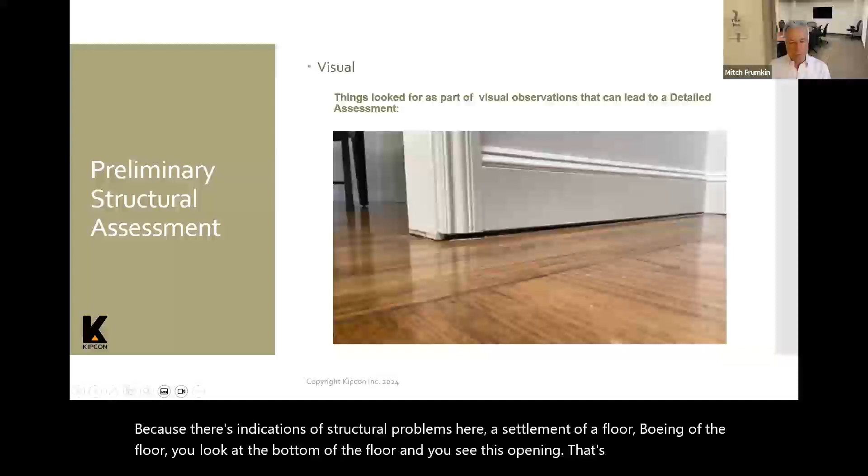Here, a settlement of a floor. Bowing of the floor. You look at the bottom of the floor and you see this opening that's occurring. That may be indicative, depending on where it is and what the engineer with experience says, of a problem with the structure because the floor is sagging. These are the type of things you look for.

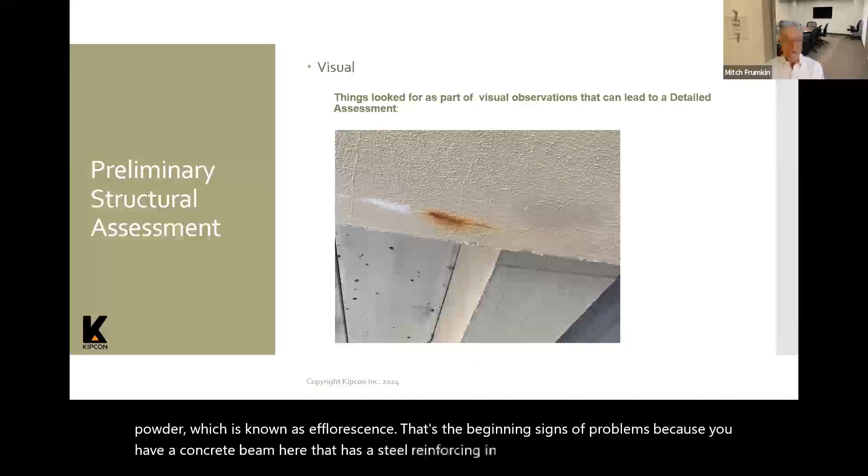Here, now you're seeing two things. You're seeing rust to the right and this white powder, which is known as efflorescence. That's the beginning sign of problems because you have a concrete beam here that has steel reinforcing in it. As the water goes through the concrete beam, the first thing that happens is it carries the salt within the concrete to the surface, and it comes out as white salty material. Then over time, it starts to rust the reinforcing in the concrete and you start to see rust.

You should do some kind of corrective maintenance to stop the water as soon as you see the salty material. But as soon as you see the rust, then you know that there's some deterioration of the structure and you need to do something. But these are some of the signs you look at when you're doing visual observations that lead you to do a detailed assessment.

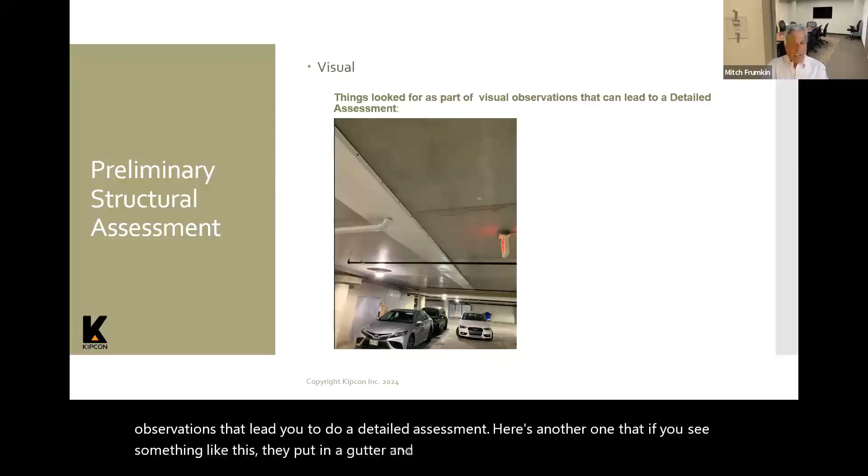Here's another one. If you see something like this, they put in a gutter and downspouts in the ceiling. In this case, it's a parking garage, so the water doesn't drip on the cars. As soon as you see this as part of your visual observation, the detailed inspection includes taking down that gutter system to see what's going on behind it. We took this down and found that the concrete behind it was deteriorating structurally, but it was hidden because they put in the gutter and downspout.

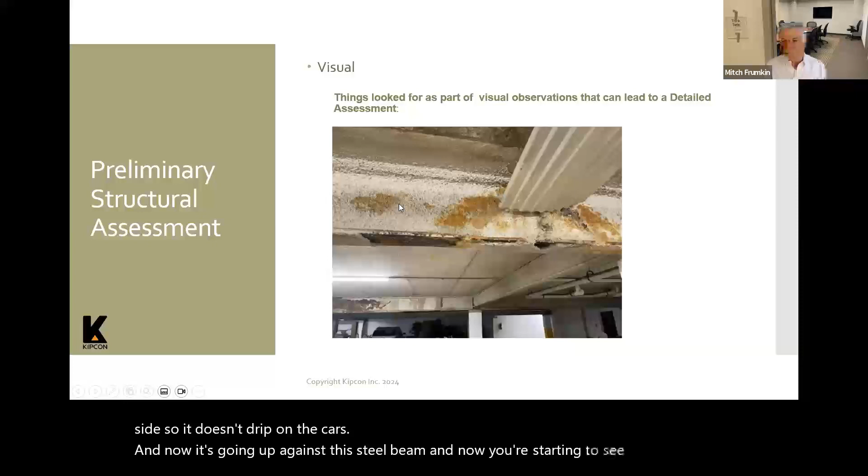So in a preliminary assessment, you'll see this. The recommendation is, first of all, get rid of this thing so the water doesn't point at this beam. But now you have to take the fireproofing off that beam to see how much structural damage has been done to it. The other thing is, you see there's a ceiling to the side of the beam. In many cases in a parking garage, if you're below the building above, you have a ceiling. If you're not, it's just exposed structure. So now you need to open up this ceiling also to see if there's any structural damage above it. That's the difference, how you look at things to go from a preliminary to a detailed assessment.

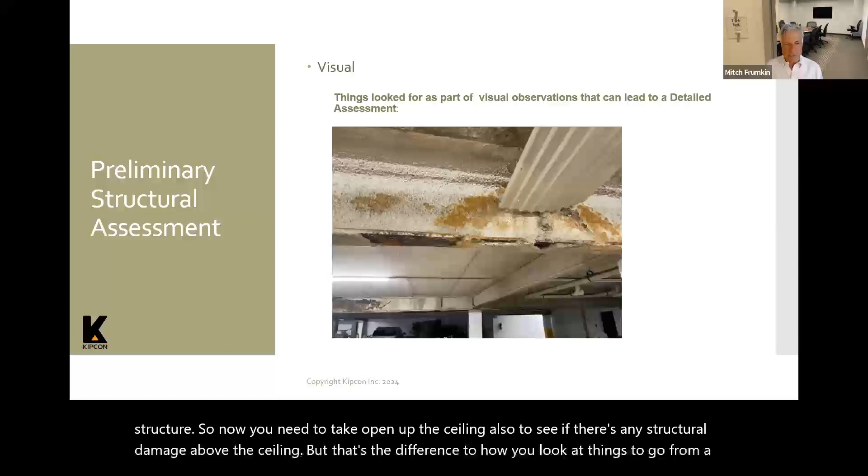Steel is very easy to look at. With steel, you can see immediately if there's any structural problems. The detailed assessment you need here is really, how do I fix it? This is a steel beam that's rusted away. In a detailed structural assessment, sometimes what happens next is you do invasive testing to observe the underlying structure. Then you may need to do material testing. The material may look bad. You may need to take some of the material and send it to a lab to see if it still has the strength it was supposed to have.

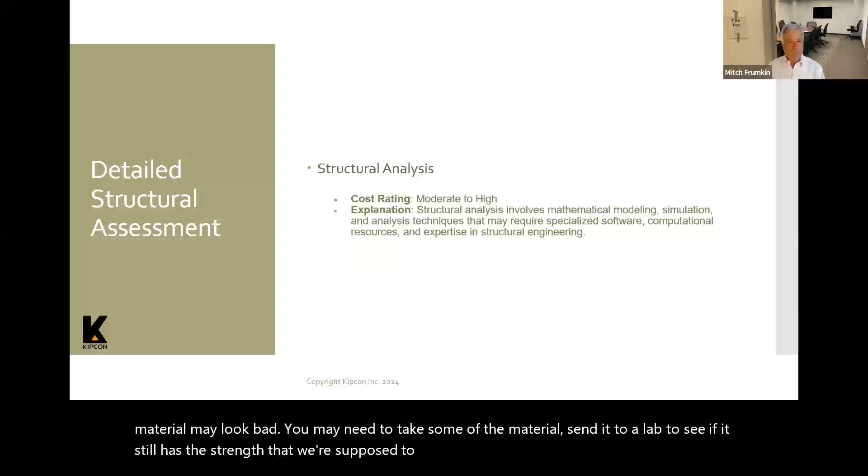The structural analysis. Now what? You go out and look at all the beams, everything you can see, and say, now we need to analyze it to see if it's structurally sound. So you need to do a structural analysis, which is mathematical modeling. I'm going to show you what it looks like. But in order to do this, keep in mind, you have to see the structure where you think there are problems. You have to know the size of the beams, the size of the columns, the materials. There's a lot of information you need to know. That's why it says moderate to high cost to do this.

But structural analysis provides data on the structural performance. It shows the stresses, strains, all this kind of stuff. The con is that it's pretty expensive, relies on specialized knowledge in structural engineering, and relies on visual observations to see what the building is made up of. But here's what it looks like, just an example. Hate to be an engineer, but I'm going to be one for a second.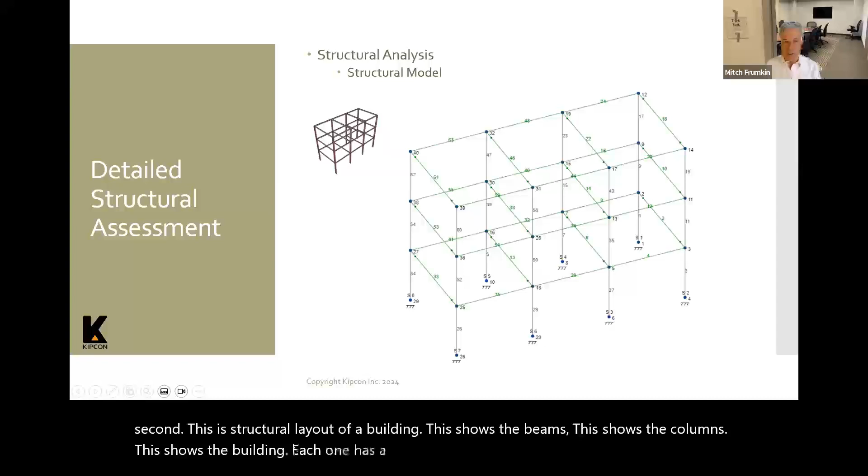This is the structural layout of a building. This shows the beams, the columns, the building. Each one has a number on it that shows what the material is and what type of beam it is. So you take this, then in the computer model you apply the dead loads, the live loads. These are the wind loads coming from the side. And again, this is based on what you see in the field. Then you do an analysis through the computer, and wherever it's red, it says it's failed. Wherever it's green, it's okay. This is the type of structural analysis that could be done as part of a detailed assessment, not as part of the original.

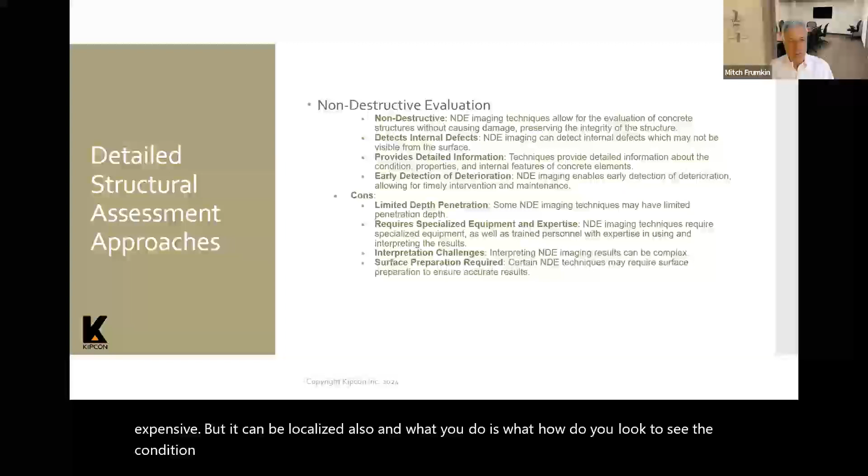Then there's also non-destructive testing you can do. It's moderate to high in cost, and you can evaluate structures depending on factors such as the size and condition of the structure. It can get very expensive, but it can also be localized. What you do is look at the condition of the structure, how it's built, without taking it apart. It's called non-destructive.

The pros are that it's non-destructive. You don't have to take anything apart really. The defects, you can see things through this that you can't see by just visually looking at it. It's early detection of deterioration, but the cons are that it only goes a certain depth into the concrete, requires specialized equipment, all kinds of things like that. But what does it look like?

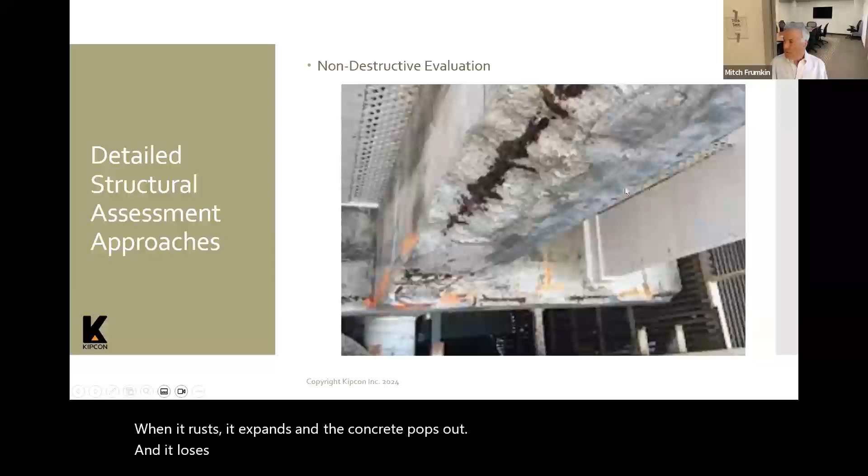Here's a concrete beam. Now you look at the concrete beam, this is a piece of reinforcing steel behind the concrete that has been getting rusted. And when it rusts, it expands and the concrete pops out and it loses its strength. The steel strength gets less because there's not as much steel, it rusted away, and the concrete is gone, so it loses its strength.

The thing that protects this concrete from moisture is the distance from the steel to the surface of the concrete. So the building code has certain requirements of what that depth needs to be. But in some cases, when it's built, it may not be the right depth, so it's exposed to moisture more quickly. So there's one way to do it. I'm just showing you a couple examples.

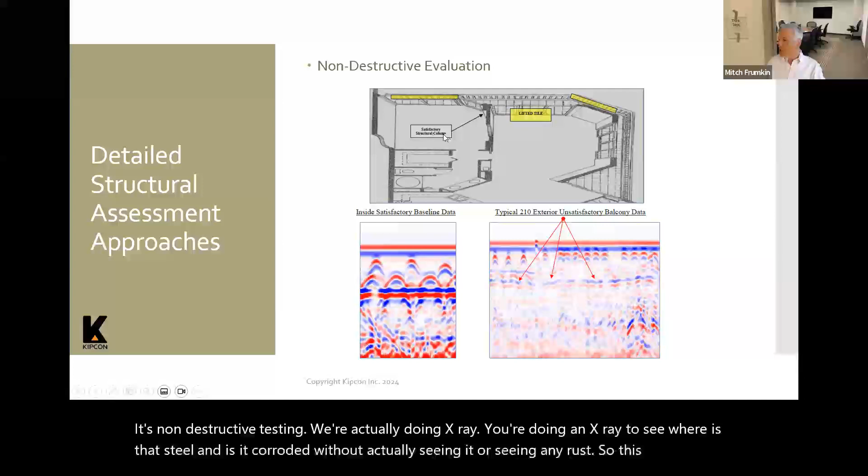It's called non-destructive testing, where you're actually doing X-ray. You're doing an X-ray to see where is that steel and is it corroded without actually seeing it or seeing any rust. So this is an example of a balcony on a high-rise building. This is what it looks like looking down on it. And then this is the X-ray on the left-hand side.

This shows satisfactory information where these lines, the different colors, are where the reinforcing steel is, what the size is, blah, blah, blah. But on the right-hand side, it says unsatisfactory, because you do an X-ray and you find that the steel may be rusted, it may be too close to the surface, so water's getting to it. But this is just one example of how you can do non-destructive testing to see what's going on, primarily inside of concrete. This is one way to do it.

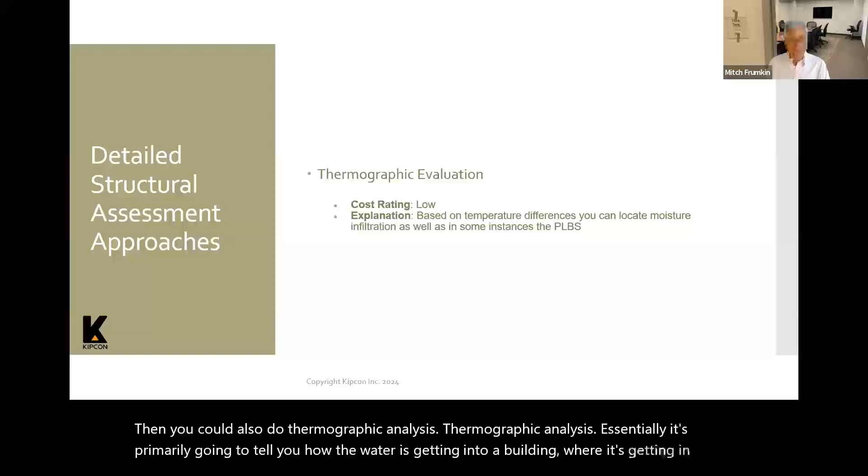Then you can also do thermographic analysis. Thermographic analysis essentially is primarily going to tell you how the water is getting into a building, where it's getting in, if it's getting in. And in some cases, it actually can show you the structure, but you essentially just take a camera, take a picture, relatively low in cost, and based on temperature differentials in the surface you're looking at, it can tell you where the water is, and sometimes it can tell you where the structure is.

So what do you do? Let me go back. You have to plan. Plan. So how do you do that? The proposed protocol for taking into account reserves, maintenance, and structural integrity: have a reserve study, and a lot of this is legislatively required, but it's what the protocol is.

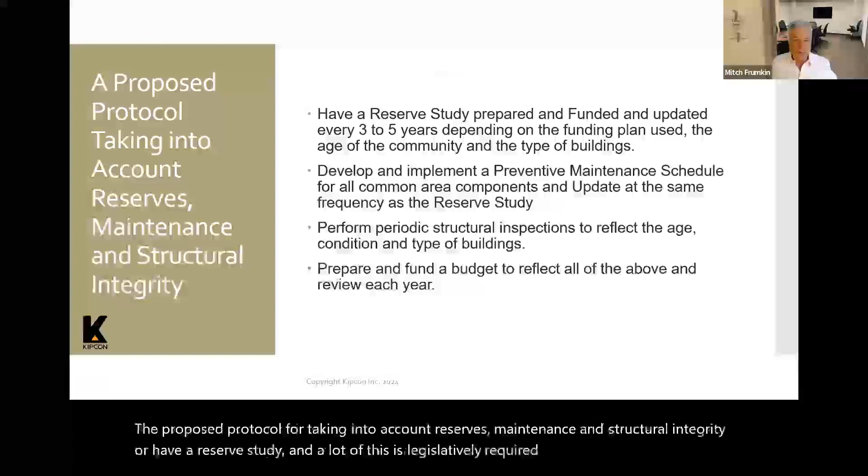Have a reserve study prepared and funded and updated every 3 to 5 years. But how often you should update is depending on the funding plan used, the age of the community, the type of the buildings. Develop and implement a preventive maintenance schedule for all common area components and update at the same frequency as the reserve study. Perform periodic structural inspections to reflect the age, condition, and type of building.

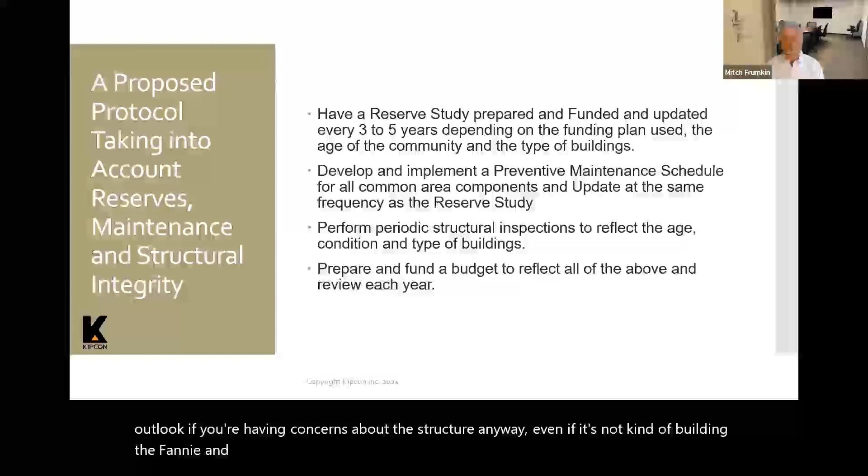And this is something, just because the legislation says that it's only for primary load-bearing system type buildings, depending on your building, you may want to have an engineer come out and look if you're having concerns about the structure anyway, even if it's not that kind of building. The Fannie and Freddie requirements do not limit what they're talking about to buildings that have this kind of primary load-bearing system. They pretty much say it's for all types of buildings.

Prepare and fund a budget to reflect the above and review each year. How often for the periodic inspections? I mentioned this already. I probably should have moved this slide up about 20 slides.

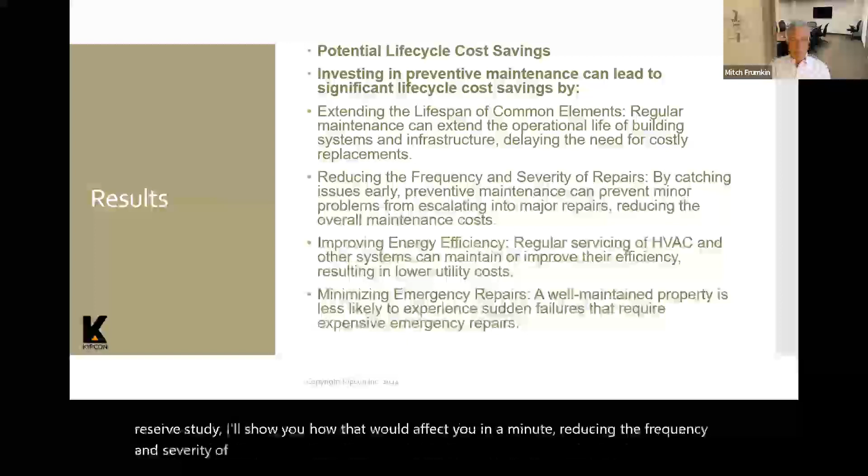Reducing the frequency and severity of repairs, because you're doing inspection, you're finding them, and you're fixing them before they get worse and a lot more expensive. Improving energy efficiency. If you do maintenance on your mechanical systems, they're going to operate better. And I would say in most places where you have a lot of mechanical equipment, you have a maintenance contract with a vendor. So hopefully they're looking at the equipment to make sure they're efficient. Minimizing emergency repairs. If you have to do something in an emergency, it's going to cost a lot more than if it's not.

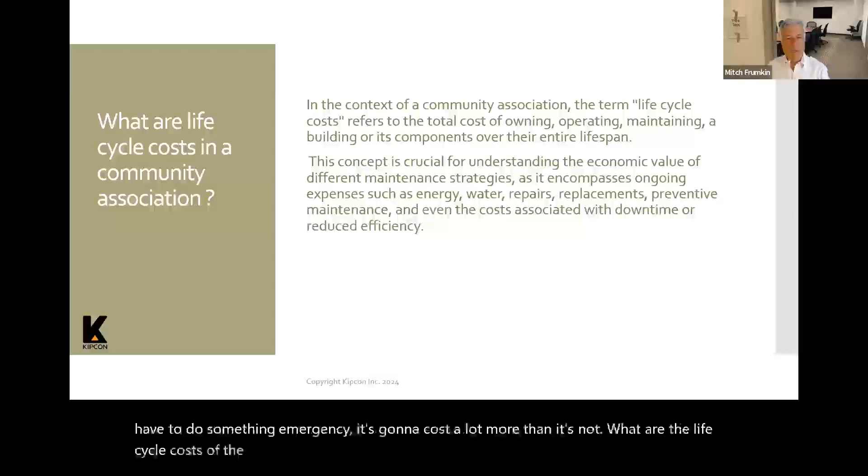What are the life cycle costs in the community? The life cycle costs refers to the total cost of owning, operating, and maintaining a building or its components over their entire lifespan. So what does that really mean from a dollars and cents perspective? The cost of preventive maintenance is 5 to 15% of the replacement cost of a component. General rule of thumb. So if you have something that's going to cost you $100,000 to replace, the preventive maintenance on that item over its life is somewhere between 5 and 15% of the replacement cost.

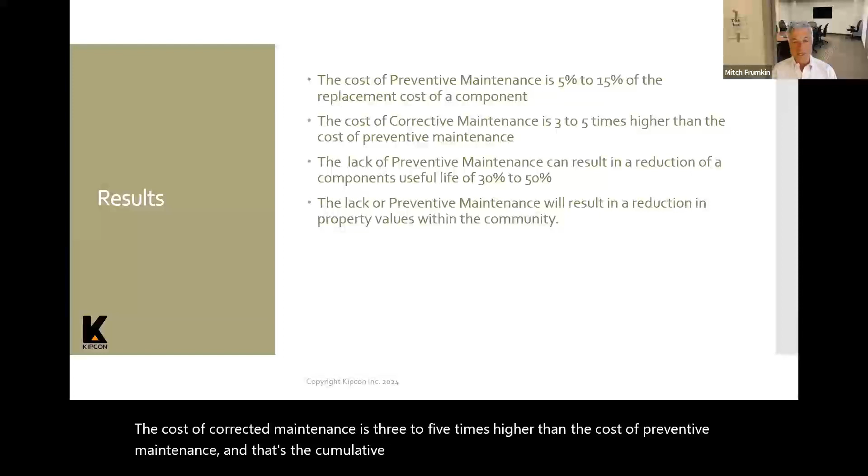The cost of corrective maintenance. So let's say you do not do preventive maintenance and you have to fix something because you didn't do it. The cost of corrective maintenance is 3 to 5 times higher than the cost of preventive maintenance. And that's the cumulative amount. So if you're setting aside 15% a year and you don't do it, and then you have to fix it instead, multiply that times 3 to 5, and that's how much it's going to cost you to fix it.

The lack of preventive maintenance can result in reduction of components' useful life of 30 to 50%. So if you have a wood deck, as an example, and you don't maintain it, instead of having a 15-year life, you may have only a 7.5-year life. The lack of preventive maintenance will result in reduction in property values. If you don't maintain something and somebody comes to buy in your community, the property values are lower.

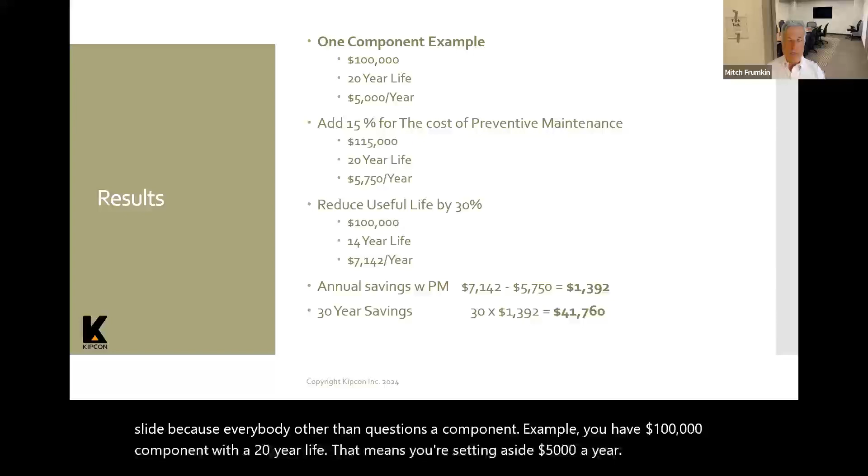Now let's take a quick, this is my last slide other than questions, component example. You have a $100,000 component with a 20-year life. That means you're setting aside $5,000 a year. Keep in mind, this is for one component, not all of them together. So this is a very small amount. Add 15% to that component for preventive maintenance. Now it's $115,000. It still has a 20-year life, and that comes out as $5,750 a year.

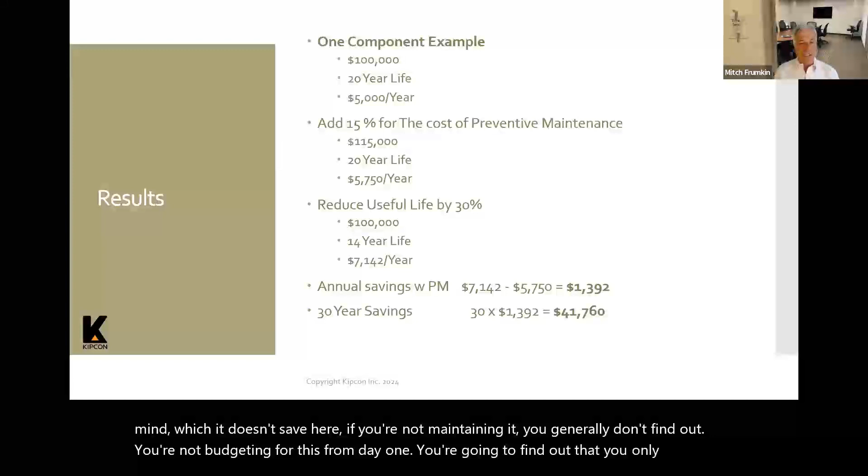Now, let's say you're not doing preventive maintenance. You reduce the useful life by 30%. It's $100,000, but now you only have a 14-year life. So 100,000 divided by 14 is $7,142 a year, as opposed to $5,750 a year if you do preventive maintenance. The other thing to keep in mind, which it doesn't say here, if you're not maintaining it, you generally don't find out. You're not budgeting for this from day one. You're going to find out that you only have 14 years left when you do your reserve study at 5 years or 10 years. So you've got even more catch up to do.

So the annual savings with preventive maintenance is $1,392 a year. Over 30 years, it's $41,760, and that's just for one component. And again, keep in mind that the catch up is going to be much more because you're not going to find out what the lack of maintenance is doing until you've had that component for a number of years already and inspect it. So now I'm going to stop my share.